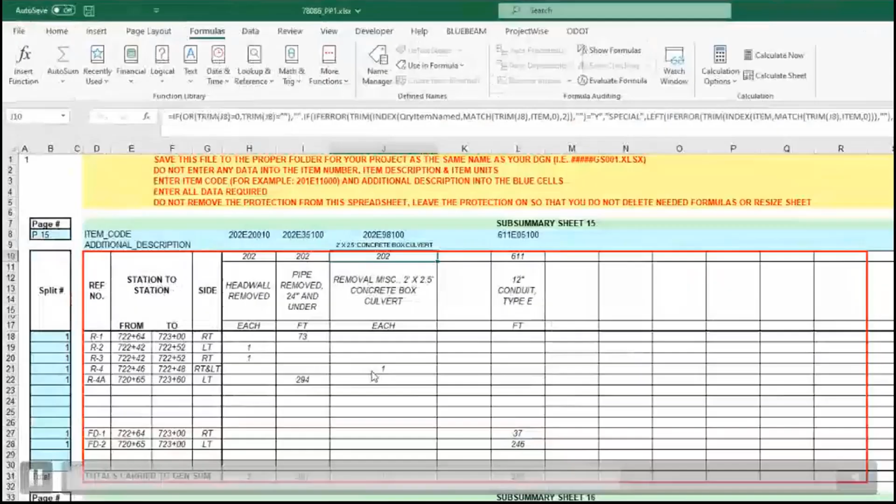So if I open up that sub-summary sheet, look at the formulas and the name manager, here's how you can tell what you're linked to. There are two named ranges in there, and if you look, it'll list the path to that GenSum file. That's how easy it is to tell what your sub-summary sheets are linked to. I know it's probably hard to see, but you just go to the name manager and take a look at the path that's listed, and that'll tell you what that specific sub-summary sheet is actually linked to. So hopefully that's pretty clear.

Just to be clear, we're changing what we recommend from linking to the add-in to linking to the GenSum. I don't know how many more ways I can say that, but that's what I recommend you guys do. That way your GenSum, you refresh it for that project when you want to, and everything for that project, the sub-summary sheets are all referencing the same copy of the item master, and it can stay there. When you file it, you don't have to refresh it - you've got that saved copy of your item master with that project at the time you filed it. So that's why we're recommending that; I think it's a better approach. The add-in was just an easier approach - you don't have to go and select a file, you could just hit Fix Links, and it can just know because the add-in's loaded.

So if you guys have more questions on that, feel free to email me or rather submit a support request.

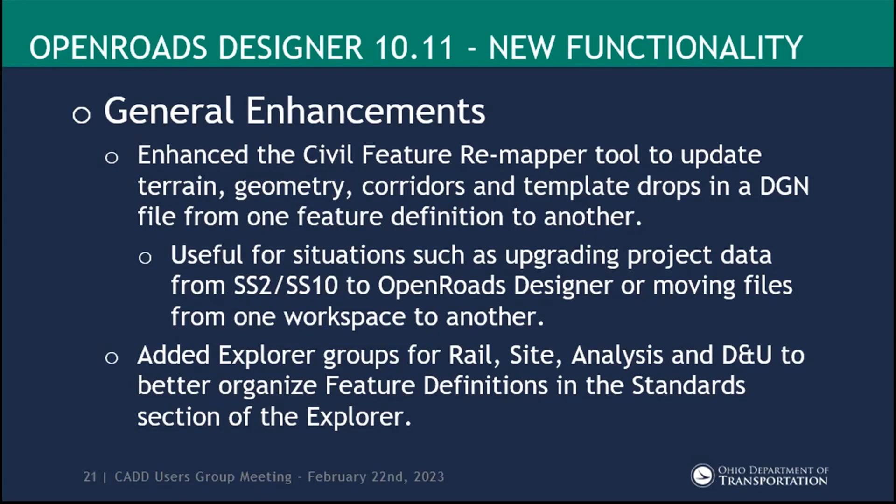Civil Labeler—we kind of scratched our heads when they first introduced Civil Labeler as a tech preview, and you had to manage it with an XML file, because we've always known they've been trying to get everything into DGN libraries. So with 10.11, they moved that XML file to a DGN library. Not really a big deal, but I'll talk more about what that impacts later, at least for the current situation.

Civil Labeler itself added some new functionality and usability, like lock perpendicular. So if you're adding in a bunch of labels, you can lock those perpendicular, your little station ticks, at the end of your guardrail or whatever. And some new border frames. We don't use a whole bunch of those, but if you like that stuff, you can go in and play with them.

You can now also override text and dimension styles. Previously or currently, you really get what's set up in the label definition. It doesn't allow the user a lot of flexibility if they need to modify it.

So kind of nice to have that too. The last bullet point here is they added a cross-section two-point method for the slope or distance between two points. We found a VBA that was posted on the Bentley communities and added that to our workspace with a couple modifications in one of our last big updates. That does what we already sort of implemented, but there were also some other enhancements included, and a lot of those were things that we had submitted to Bentley as well.

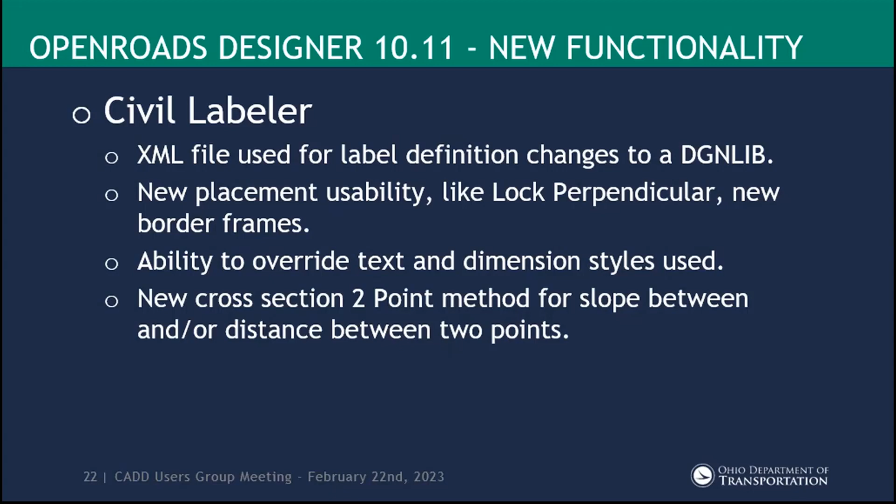You can now add your station ranges on your sheets with a new text favorite. So for plan, profile, and cross section, there are text favorites for minimum and maximum stations. Hopefully we don't have to go in and label those on our plan and profile or cross section sheets now — it'll just read the stations that are in the sheet file.

We will need to figure out how to integrate those text favorites into the item types we're currently using so that they're populated in the sheet manager. And that brings up a whole other thing: what happens if somebody modifies the sheet stations within sheet manager? That'll be a programming challenge for JD.

There's a new expression builder. This probably doesn't apply for most folks sitting out there unless you're really dealing with workspaces or modifying things. Maybe you need to add some new item types for something we don't have, or something special to your project. What it does is allow you to go in and build an expression based on an element's properties — you select the element and it'll show you the properties, and you can build your expression that way.

I wasn't sure how to word this one, the Create Templates classifications integration. In the Create Templates dialog, they've added a new classification option or setting that you can add to any component. So I can tell my pavement that it's roadway, or my sidewalk that it's sidewalk, median, shoulder, roadside grading, whatever the case is. This used to be called semantics by Bentley, and it's now been renamed to classifications.

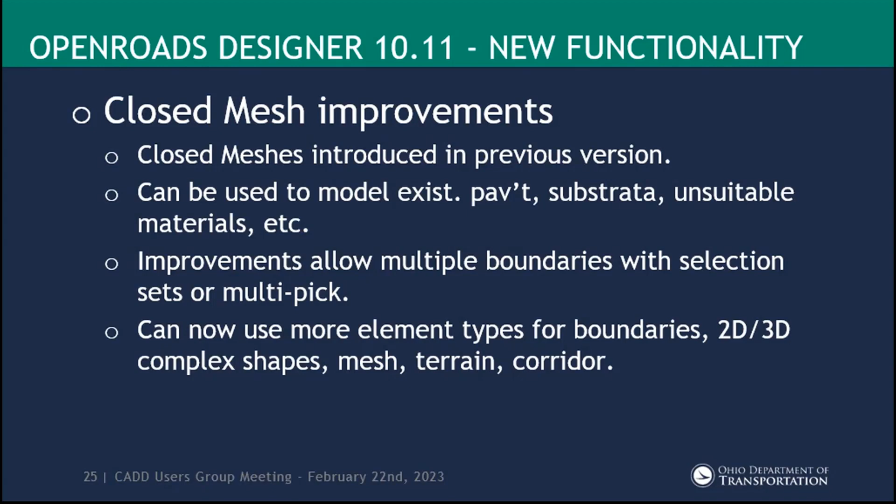The last bullet point here is you can also use different element types as boundaries — different 2D or 3D complex shapes, meshes, terrains, or corridors. In one of the examples in the Bentley playlist, they actually used a selection from the corridor model's cross-section view, using the bottom of their pavement to create a mesh that went down to their existing ground in a fill type situation.

The next thing they added was computing station offset with expression, so you can add a reference element or alignment to a component. If we select sidewalk, for example, I can go into the properties dialog and tell it I want to add a reference alignment to that. In the properties, it'll list the station and offset of that element, where it begins and ends. So from a quantities perspective, all you really have to do is select that element and you have all that information there.

You can also add multiple reference alignments to a component. Say at an intersection, for example, you've got your curb or sidewalk going around the radius of the return. You can add in the reference alignment for each roadway.

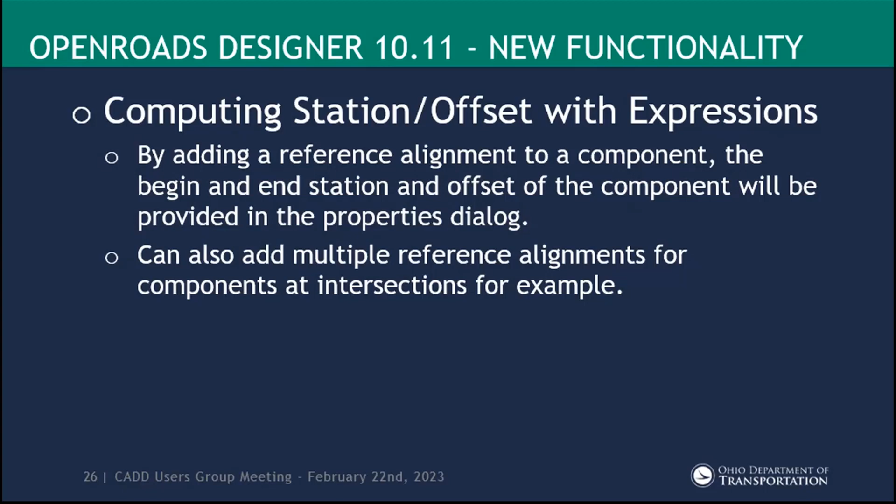The create cut and fill volumes tool now will search for previously created meshes. So if you've gone in and created your CADD file and created those prismoidal meshes to get your earthwork volumes - I know I've done this on numerous occasions - I just rerun the command, and next thing I know my quantities are double or triple because I have 2 or 3 sets of those meshes in there that I forgot to delete, or maybe the level was turned off or something like that. So it'll search for that when you run the command.

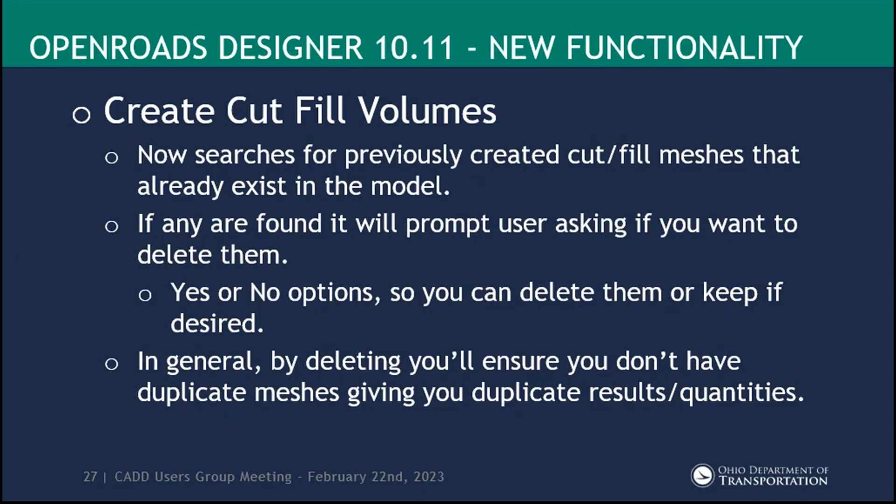It'll prompt you asking if you want to delete them. You do have the option to say yes or no, so you can delete them or keep them. In general, I'm going to recommend you delete them and just start over so you don't add in or have duplicate results or quantities there.

The feature definition wizard, this is another one. If you're not really working with a whole lot of workspace management type stuff, this may not apply to you all the time. Again, it might, or maybe you have something special to your project you're trying to create a new feature for. But if you've ever needed to create a new feature definition, you realize there's a lot of parts that go into it. So this is kind of like I would compare it to the corridor objects dialog, where that bucket list icon shows you everything about your corridor.

This kind of does the same thing with the feature definition. It'll let you create your feature definition, your feature symbologies, your element templates, set your levels, weights, colors, add your annotation groups, item types - rather than bouncing around going 'oh I got to create the feature, now I got to go create the feature symbology, which means I got to go create an element template, and then I got to come back and do the annotation.' So it's kind of neat. I haven't really played around with it much more than looking at the video, but I imagine that'll help at least us, and I'm sure in some cases it'll help some of you.

There is a new super elevation cross slope text favorite. What that means is we can add that into our curve data or curve set that gets plotted under our drawings, and we can populate the Emax now. Currently we just have 'Emax equals' and a blank field for you to go edit. Now it'll read the super elevation from the curve we've assigned to it and apply that to our curve data. It's also dynamic, so if that super elevation rate changes, the curve data will also be updated, just like any of the other curve data would be.

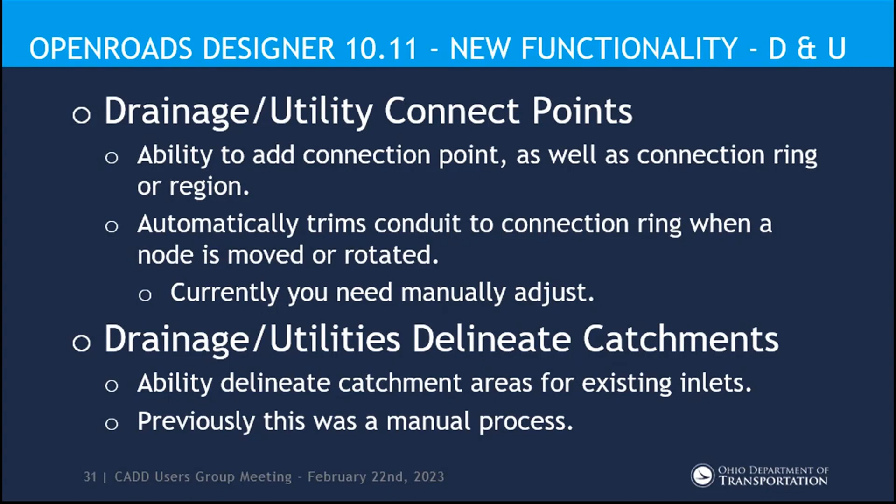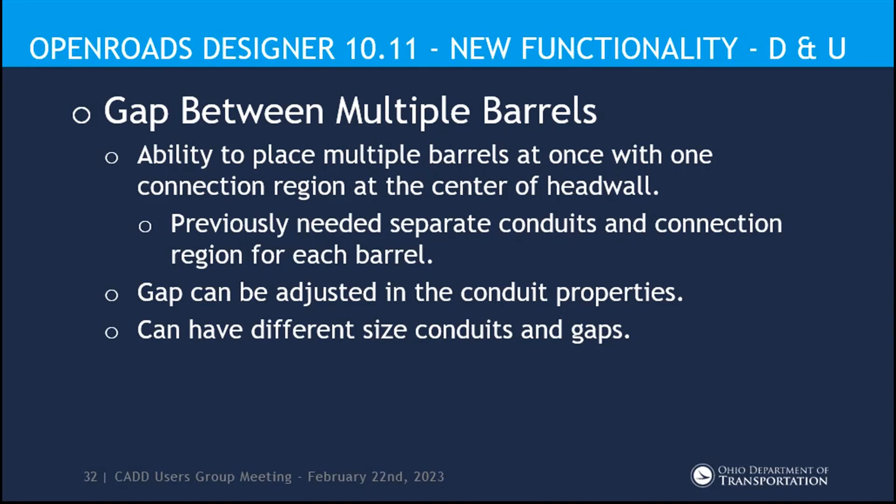I know we have culverts out there that are made up of multiple pipes and barrels, and in my experience I don't know if I've ever worked on a project with one, but they heard folks asking for this and added the ability to add multiple barrels at once with a single connection region. Meaning you can select the center of your head wall and that'll be your connection point, whereas before you had to create separate connection points for each pipe. You can also adjust the gap between those pipes - I don't know how that actually works right now - and then you can have different sizes of conduits and pipes within those. So maybe your outside conduits are smaller than your two inside conduits, maybe on a 4-barrel type situation.

So there are new item types that are added here, support for the new drainage and utility feature definitions and the single source of truth. We've heard this many times from Bentley, so hopefully this really gets us there where we can see the item type properties that were added in plan view, profile, cross-section, 3D, without having to go back and forth or even run an extra utility to sync up all those properties.

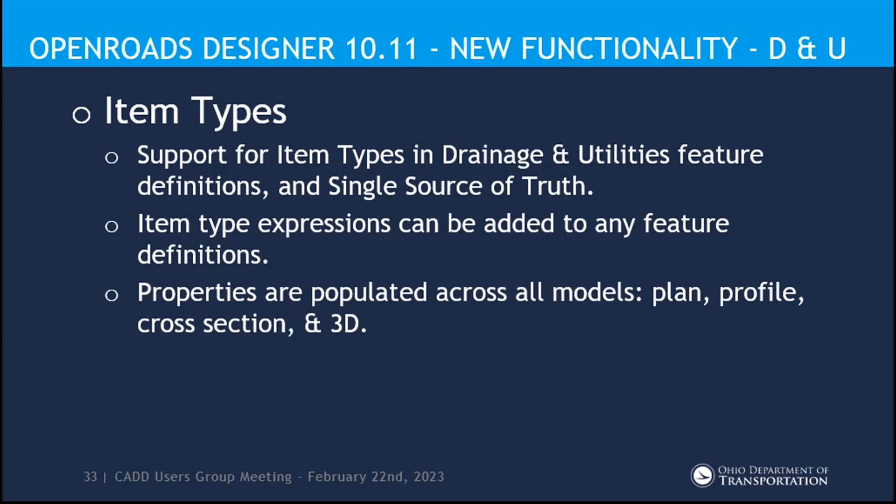So pretty much everything I just mentioned as far as MicroStation and ORD is in all these links. If you want to review this PowerPoint later, one of the guys can post all these in the chat and you can come back and look at those. The YouTube playlist really shows all the examples, a lot of things I pointed out. There are a lot of other enhancements and updates - those are just kind of the big ticket items there.

All right, so what are ODOT's issues or concerns about maybe going ahead? Again, there's a schema change here, so we need to be cautious of that so that everyone's using the same schema. But what else have we kind of run into?

One of the things right away is Civil Labeler. I mentioned earlier the XML file conversion to DGNlib. They do provide an import tool which works really well, brings everything in. What I did notice right away is it leaves off any of the leaders that are attached to my labels, so we're going to have to go in and clean up every single one, check every single one, make sure they all still work the way we intended. Not really any showstopper by any means, but it's just going to be an effort on our part before we get that out.

And if you were to go ahead - I know some folks already have moved to 10.11 - when you go in to load Civil Labeler, you're just getting a blank dialog because it's looking for a DGN library that we haven't defined yet for 10.11. So essentially it's not going to work if you migrate that way. You can import that XML file on your own if you're comfortable doing that and modify it, or create your own DGN library and add it. That's one of the advantages of going to the DGN library versus the XML file - we can have our predefined labels, and then you could set up your own company or project ones, add to a DGN library, and have them all populated in a list.

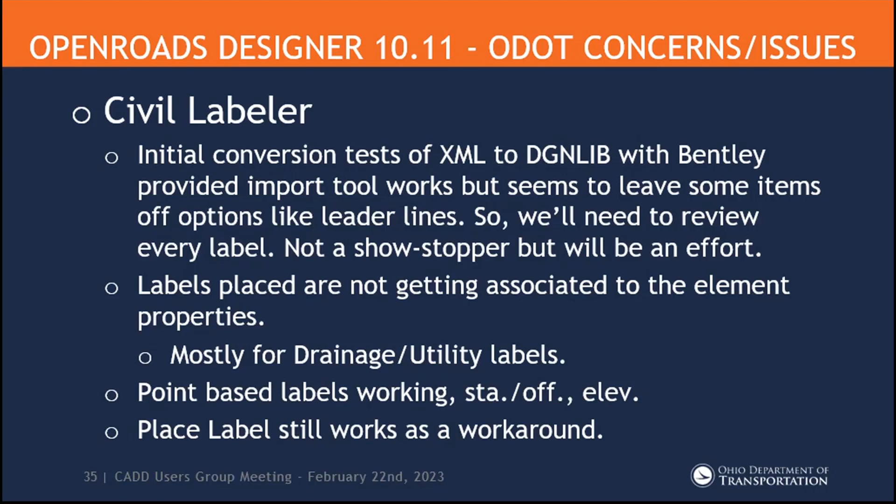JD just said that Bentley support has told us that the item type issues with civil labeler are fixed in the next release. So, probably should have been - well, we don't know what the next release is yet, but...

The drainage and utility item type sync app that we have stopped working with 10.11, but we've already released an update to that. So as long as you're using the current version of the Workspace that has version 1.006 of that, you should be good to go if you're using 10.11.

If you're using ProjectWise managed workspaces and the new manage configurations part, as you can see on that screenshot, when you launch ORD or MicroStation on the left-hand side, you'll get this manage configuration dialog. You can define multiple locations if you have different clients or different workspaces you're pointing to. You can do that in your managed configuration, but what we found is that is breaking our ProjectWise managed workspace.

Bentley says that that'll be fixed in ProjectWise 4.0, as well as a whole bunch of other updates that they keep saying are coming there. So we're waiting on that. The quick fix or workaround would be just to reset your user preferences, and that cleans up any issues that you might have had.

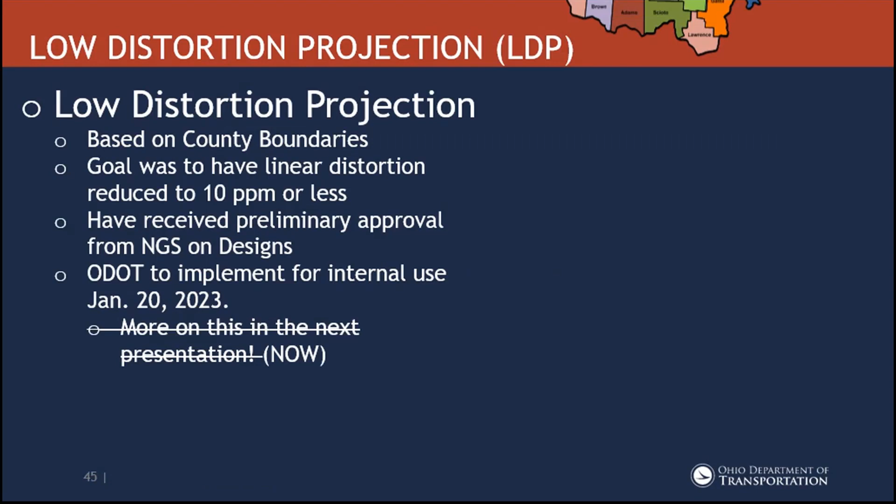All right, we're going to switch gears a little bit and talk about some coordinate system updates that we have. Last time we had a user group meeting, I talked about the low distortion projection systems that ODOT was coming out with. We've named those the Ohio County Coordinate System, or OCCS. I still call them LDPs, so it's tough for me to make the switch to the new name. But I wanted to talk about the background, so we understand the direction we're going, and then get into how we can actually use it and where we can find that information.

They're going to be based off of county boundaries. We did that to try to make it more user-friendly, instead of combining it based off of some landmass or something like several other states do. Our goal was to try to reduce our linear distortion to 10 parts per million.

So a really tight coordinate system that basically allows our grid distances and ground distances to be the same. That's kind of the main goal behind it.

So we did implement these for ODOT use, and then anybody else can also use them as well, on January 20th with the DRRC update, and spelled it out in the L&D and the surveying mapping specifications.

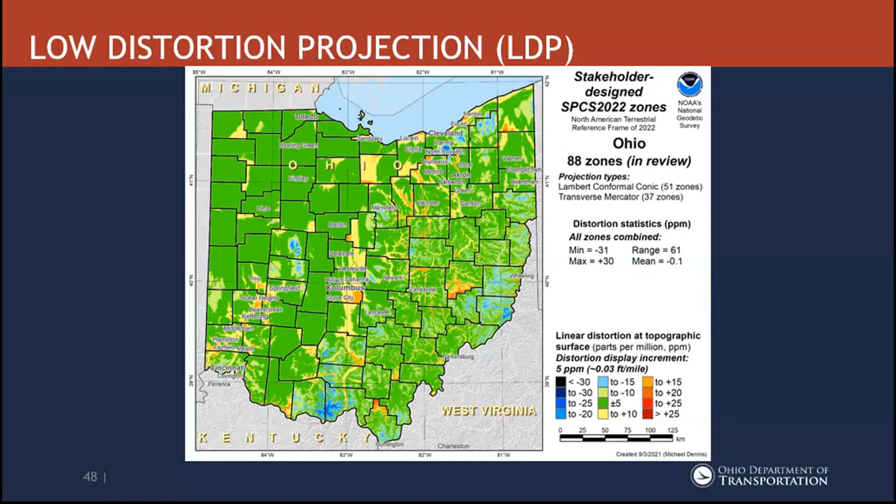So that's what we've went out and did, and we released those. We have 88 new zones, and they were approved by NGS for approval in the next release anyway. So we just kind of moved on with it.

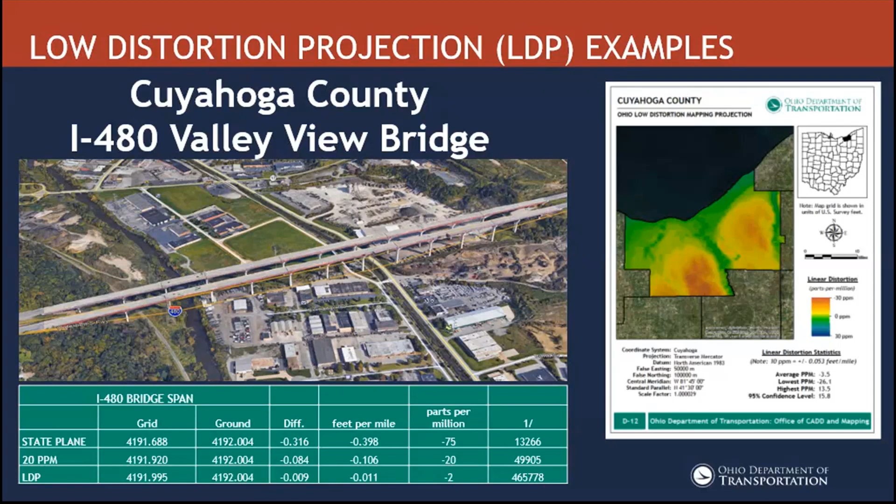Now, if we use a low distortion projection when we were collecting that information, like say we're using a GNSS receiver and we use the LDP, we would see 9/1000ths of a foot of difference between the grid and ground distance. So essentially, by using low distortion projections, we're making the grid match ground. It's going to save a lot of time and effort when scaling projects. Everything's going to fit together a lot easier between these different coordinate systems, and it's going to allow everything to reproject a lot more smoothly.

So we released these on January 20th. The Ohio County Coordinate Systems are posted on our website. I didn't do as good a job with the links as you guys did, but you can find them on our website. There's a page for it, and I do have it embedded in the PowerPoint as well.

But moving forward, ODOT projects are going to be scoped with the OCCS county mapping projections, unless that project doesn't fit that type of environment. So we do still have the state plane north and south inside the standards, and we'll get to that in a little bit. But we can still scale a project if that fits the project you're working with.

If the distortions are too big, maybe you go into two different counties or something like that, it may not work by just selecting one of them. So we still do have that option.

So what's on our webpage? We have a manual that we've developed, so we'll get into a little bit of that. We also have the zone parameters and some test points as well, so if you want to test your software, we have some points as well as the LDP coordinates of those. We generated Esri projection files, so PRJ files for all 88 counties, and we have those zipped up on our website. We have Trimble and Leica file formats, and we'll talk about some of the other manufacturers as well on the website. So there is a link there and a bunch of downloads that we have available.

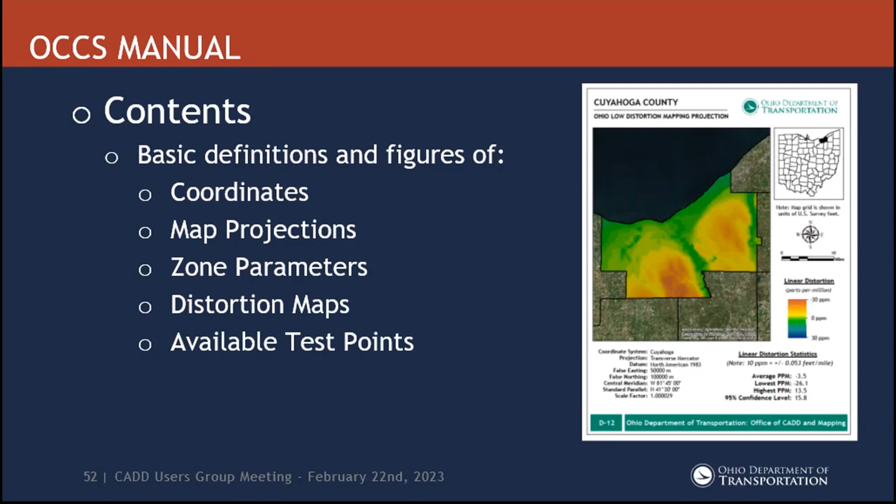So I wanted to talk a little bit about some of the different manufacturers. For Trimble equipment, internally we mainly use Trimble and Leica equipment, so that's why I'm going to go through a couple of those examples.

For TBC, you can go into the Coordinate Systems Manager and then import the .csd file that we have available on the website, and that will show all 88 of the counties. If you're looking for other state plane zones and things like that, they're just hidden in there. So if you do work for other states and all of a sudden you're like, oh, where's Indiana? You just unhide it in there, and then it'll end up populating in your list. So we didn't delete them, they're all still in there. We just hid them to make it a little easier to find.

In the data collectors, very similar process. You just have to browse and copy that custom CSD to the Trimble Data System Files folder on your data collector, and then that'll show up inside of there as well. Very similar process for Leica Infinity and Leica collectors. Basically, you just go into the coordinate system tool and then import in a TRF set file. You basically just bring that into your DBX folder on your SD card or your collector, and then you'll have those coordinate systems inside your software, both in the office and out in the field.

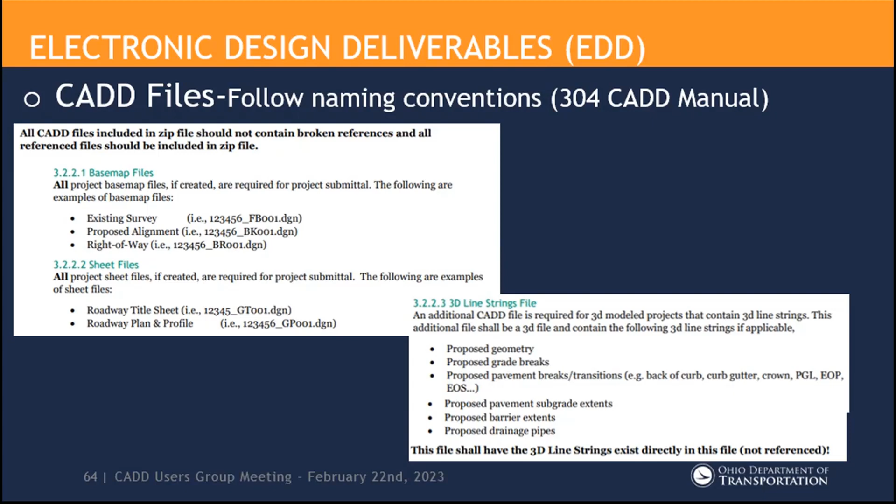So base maps and sheets, I think we all know what those are. Those are hopefully pretty easy. You just select the ones that you want to include in the zip file and you include them. Now, 3D line string files, we don't really have a file set up for that just yet.

I added a video here to go over a process that you could use to create a 3D line string file. So some things to know: when the contractor's trying to pull in DGN files, they're kind of limited on what they can read. They can't really read sheet models at all, mainly just the base maps, and they can't read references either. They can't go and read across references.

So this new requirement to include these 3D line string files is really going to be making a static line string file for them. It's going to involve referencing in your line strings, basically merging all those references into the file and calling that your 3D line string file.

I get that that's a little bit of additional work, but it's something that I think is needed moving forward as we are trying to pass this data along. Let me play this video and go over a little bit more detail.

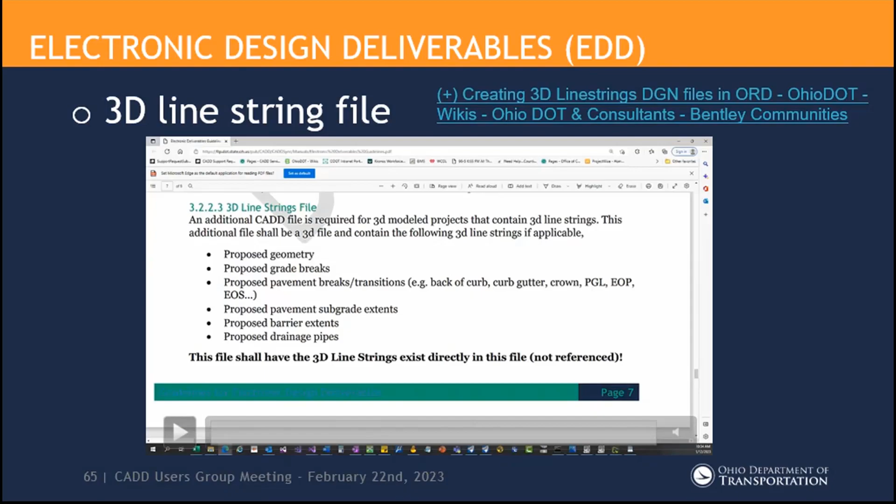So here's a section in the document, and I list some of the things that should be included, like proposed geometry, your grade breaks, pavement transitions, barrier extents, things like that. This section will most likely be updated as we fine tune what should be in this line string file. But really your edge of pavement, things like that—those 3D line strings that you're generating automatically anyway when you're creating it—are what we're really looking for here.

And it can't be referenced because the contractor cannot see that data, so I bolded that here. We're going to create this file, but can't leave those references in there.

So I should be moving on to give a quick demo. Hopefully—I guess I had a lot to say in this video.

I guess I want to reiterate that it will be static, right? You're merging these graphics from the reference into this DGN file. So it's something you would do at the end real quick. Maybe you set up the file with the references and then make a copy of that file when you're ready to merge it. So if you ever do change something in the future, you can go back to that original one with the references and redo the process.

I did create a new file type for this. So if you use the Create Design Files app, it should be the KL, I think, if I remember right. Yeah, it says 3D line strings as the description.

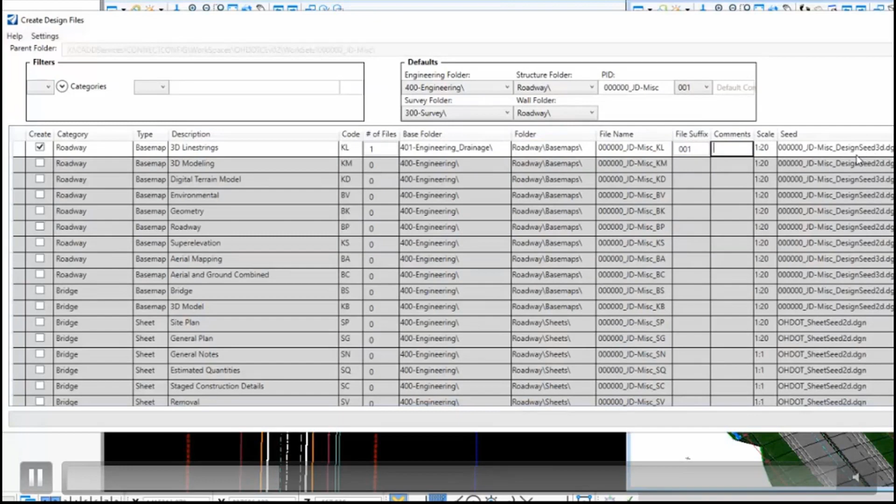So you can go create this file. You want to use the 3D seed file since these are going to be 3D line strings, right? So you might as well—it should be defaulted to the 3D seed. So after we create that file, go ahead and open it.

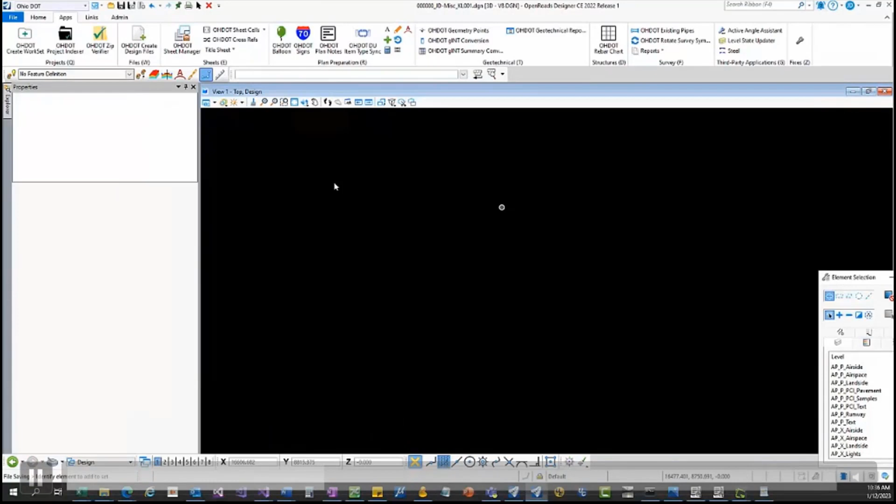And all I'm going to do is add the references to, say, my geometry—my BK, my corridor files, things that contain those proposed line strings. So most of the time it's your corridor file. So I'll go and add these in.

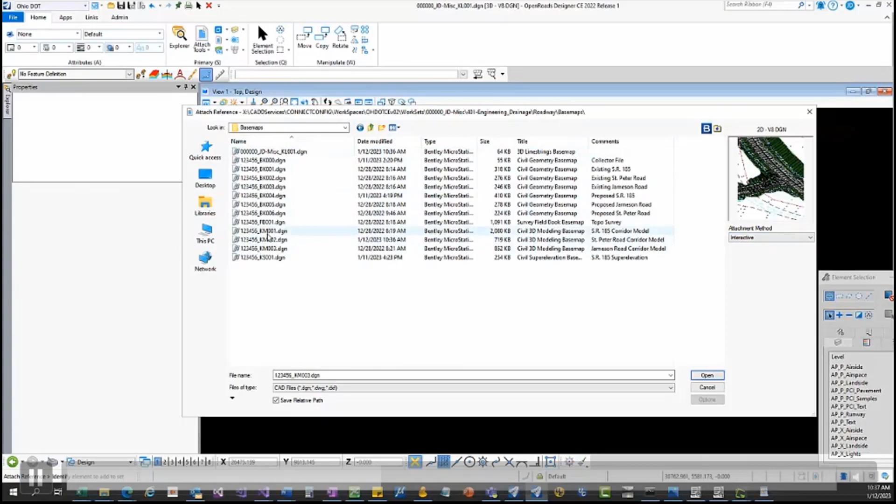And this video has also already been posted on the wiki page with audio. If you guys have been searching around, you might have already watched it. So here I'm just going to add in those corridor files.

And when I add them, I'm going to switch the model that I want to include to the 3D model and not leave it on the design one, right? I want to make sure I grab the 3D reference because that's what contains my 3D line strings.

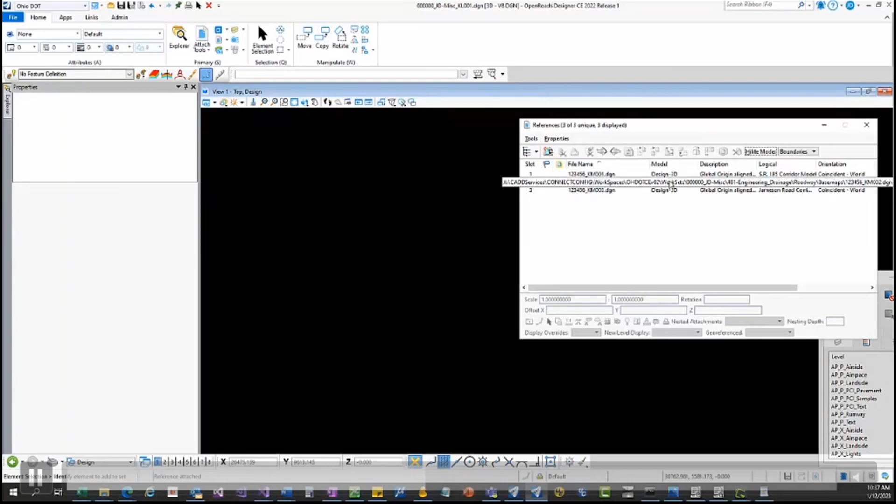So after I add them, I'm going to go through and just turn off levels—all the surface levels, the things that really aren't 3D line strings that we don't want to include in this file. So you just take a look at it and see what's still on, and go through and turn on or turn off what you shouldn't need to see. So mainly it's the surfaces, and then you'll end up seeing edge of pavement, all those grade break lines—that's really what we're after here.

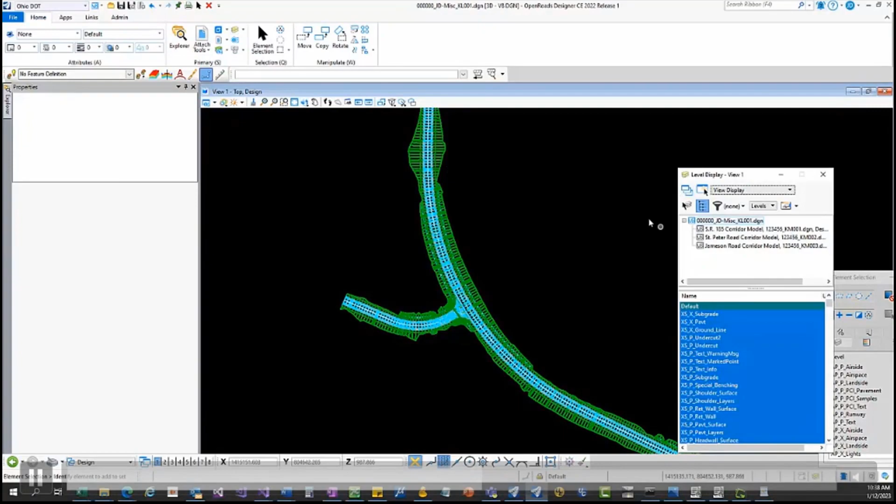And again, we'll fine tune the requirements as we get this more in use and get more feedback from the contractors of what they would really like to see. But this is going to make it a lot more feasible for them to actually pull in the data.

So after I get all those levels turned off, you can rotate around and see if you're missing anything, or if you still have anything on.

So then after you do that, I'd recommend the workflow would be to save this as a copy so you can come back to it if you make changes. Maybe you keep this as the reference copy, and then make another copy for doing your merging in. That way you don't have to keep re-adding the references every time you make a change. Hopefully that makes sense.

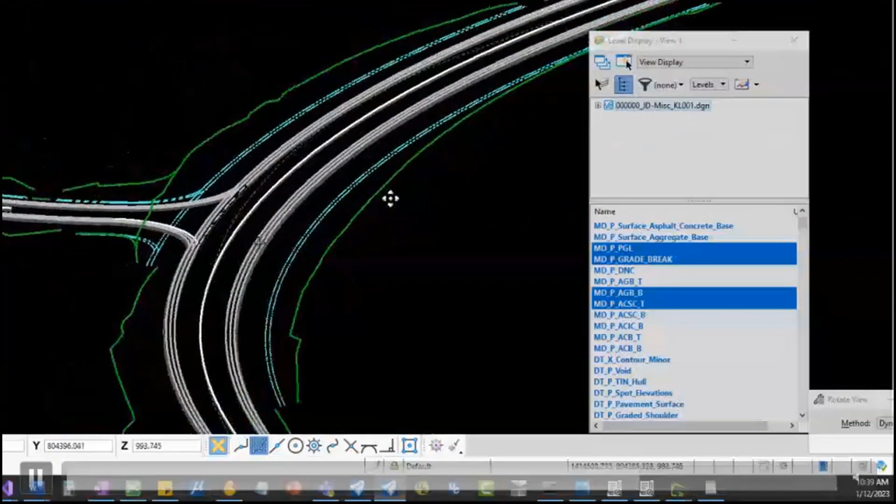So I'm just kind of looking around, seeing if the line strings that I expected to see are there. I do. So I think, if I remember right, I come up here and save a copy of it, so I'll do a save as, just to save myself. But again, you're going to do this at the end of your project, when you're close to the end, where there probably won't be more changes.

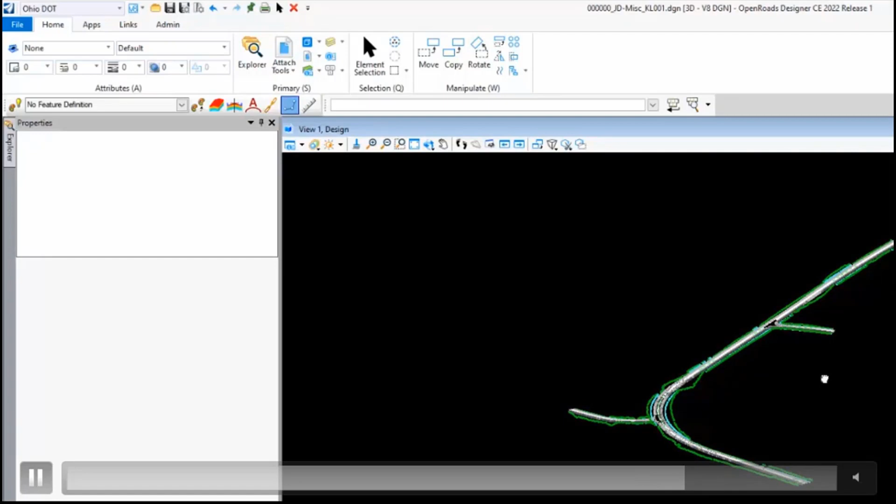But let me jump forward a little bit here. Oh, and I shouldn't have done that. Oh, man. That's why I don't like presenter mode. All right.

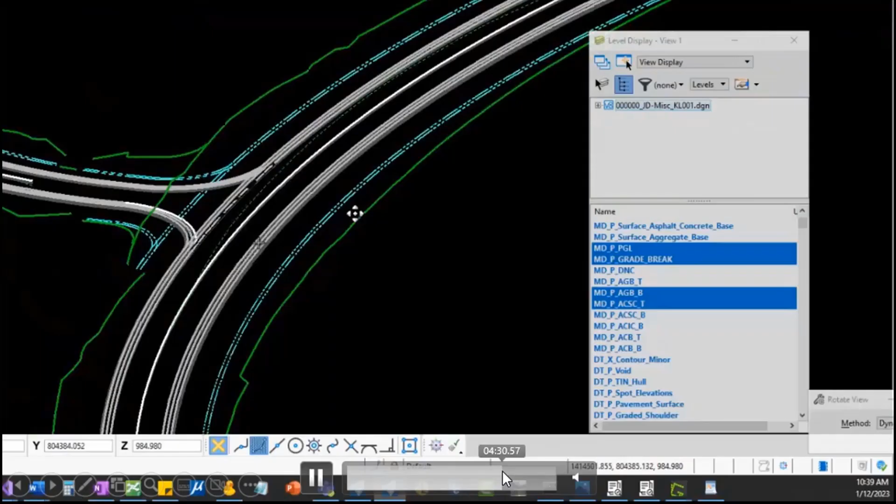So I'm doing the save as.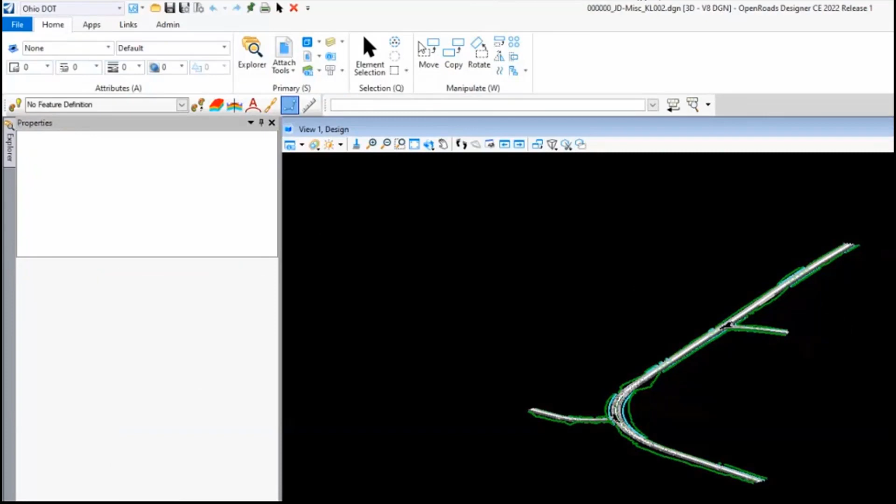So in my copy now, here's where I'll just do my merge, since the contractor can't read across those references that I added. So I'll go to my reference dialog, right click on it, and hit merge into master, then click in my view, and that will merge the references into this file, only the levels that I have displayed. And there is your 3D line string file.

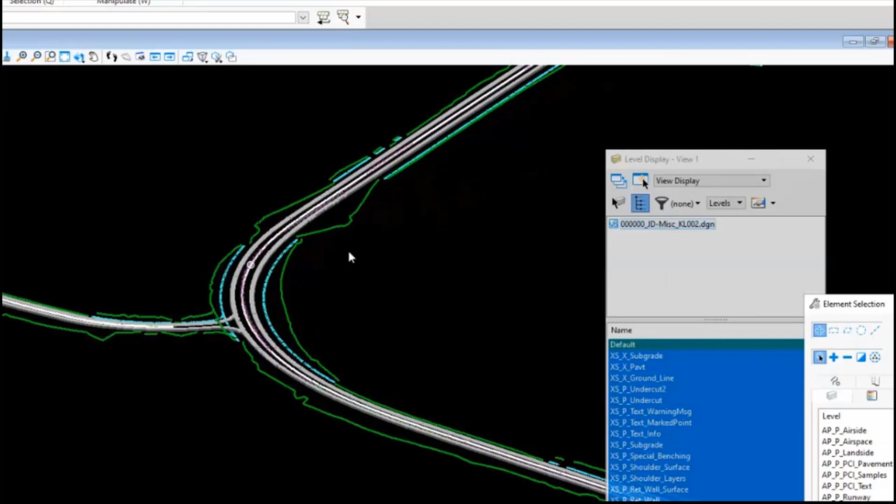So it might have been a little longer video going over a lot of stuff, but really: add a couple references, merge it, there's your 3D line string file, include it in the zip file, and that'll help the contractors out. That's a newer requirement in the electronic design deliverables guideline that wasn't there before. Back in the Geopak days, we really didn't have 3D line strings to do something like this, unless you were doing like the OpenRoads tech. So hopefully that's not too much heartburn for you guys. I do realize it's a slightly additional effort there.

So moving on, some other things: the alignment files. While the contractors can read in your DGN data and get those line strings, when it comes to alignments, it's not going to read in the stationing data. So while DGN graphics are good for bringing in those 3D line strings, when it comes to the alignment data and stationing, it doesn't work so great right now. That is why there still is a requirement to take your alignments and put them into LandXML format, and the contractor can bring those in and get that stationing data with it.

So some recommendations, or requirements: each LandXML file should only contain one horizontal alignment. Don't put all of them in one, but you will also include your proposed profiles if there are any proposed profiles - you can include that with that alignment in the same LandXML file. And then when it gets time to running this app that'll help you, it'll actually extract those contents from the XML and list it, so people can just look and see the names and profiles that are in those files without having to dig through the files.

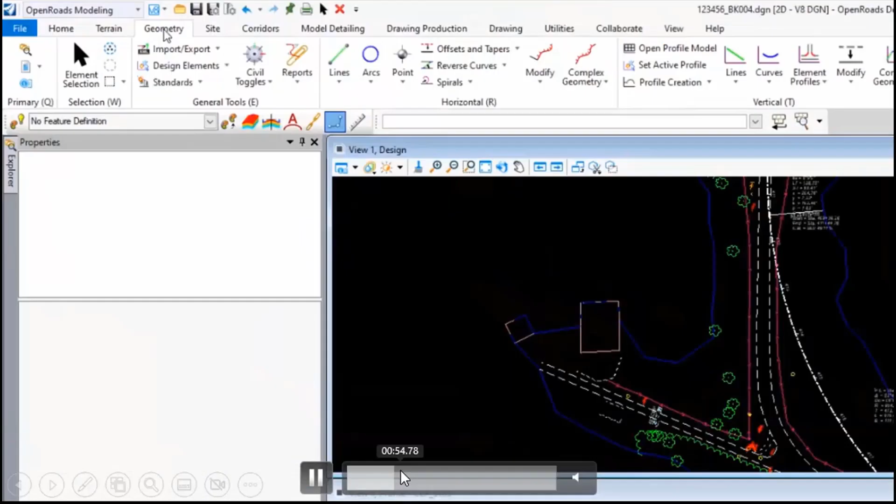Jumping forward here - I'm over in my geometry, and you see that import export option. You go down to export geometry, and you'll get a heads up display telling you what you want to export. Come in here and choose LandXML.

You can leave it on that 2.0 version. You can check on 'only active profiles' - so if your alignment has a bunch of other scratch profiles, maybe you did some ditch profile work or something, checking that on means you'll only get the active profile, which should be the proposed profile you want to include.

So you'll just click through the prompts. You're exporting it out as a LandXML type, then select your alignment - go over and select it, then reset, because you can select multiple, but we don't want to select multiple, we just want one per file. Click on that, reset to complete your selection, and then you should get prompted with the Save As dialog.

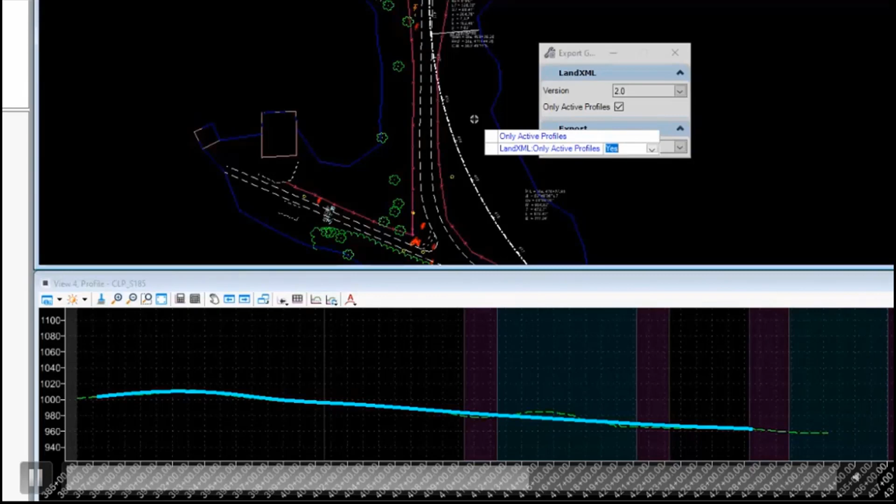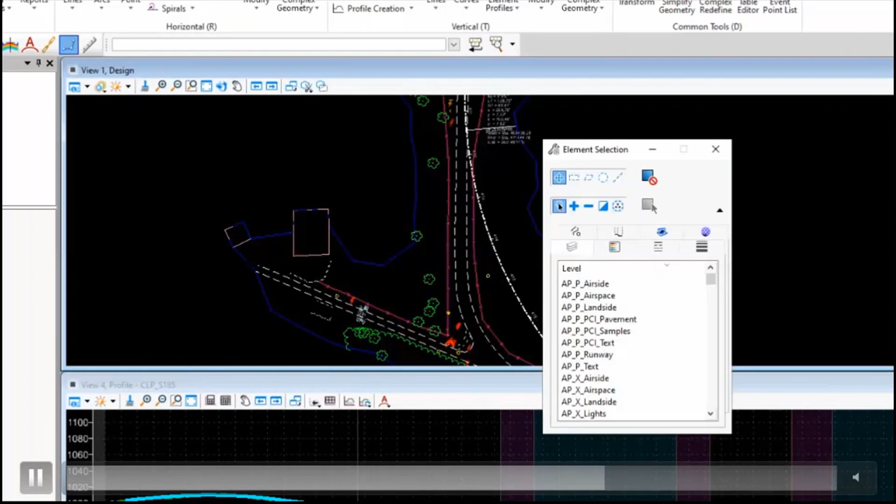We're just clicking through all the prompts here, all the different options. So here's the Save As dialog - you can choose where you want to save it. I launched this outside of ProjectWise, but I believe a few versions ago they fixed it so it would open the ProjectWise dialog instead, but since I didn't launch from ProjectWise, it didn't happen here.

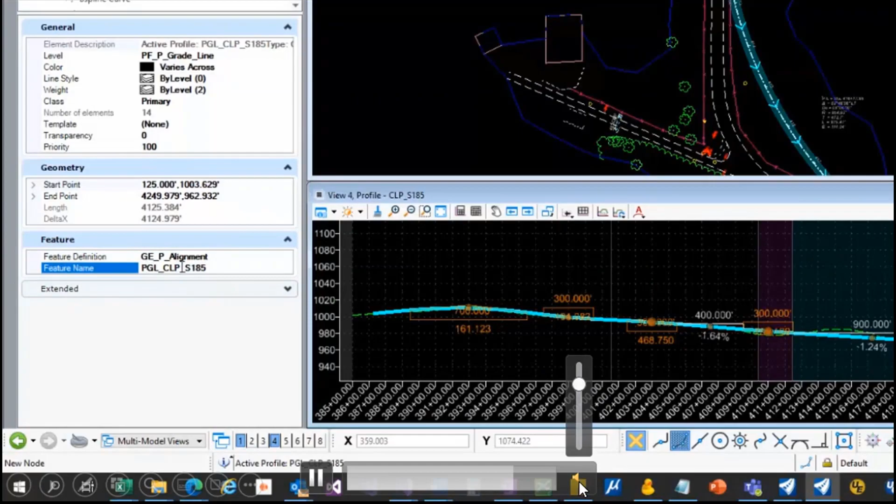But that's how easy it is to create a LandXML file - you just click on your alignment and it generates that LandXML file. So I'm showing the profiles, feature name - I think I'm just showing this because it will show up. So I opened up the file, though you don't have to open it up.

But if you take a look, you can see the name is in there, and that's what I'm going to pull when I read it. Same thing with the profile - the profile name is in there. So you do want to make sure you're naming your profiles and alignments according to our CADD manual.

Typically the CLP and then the route name for Centerline proposed. So that last thing was just noting to follow the naming conventions so that people know what they're looking at when they pull in these LandXML files.

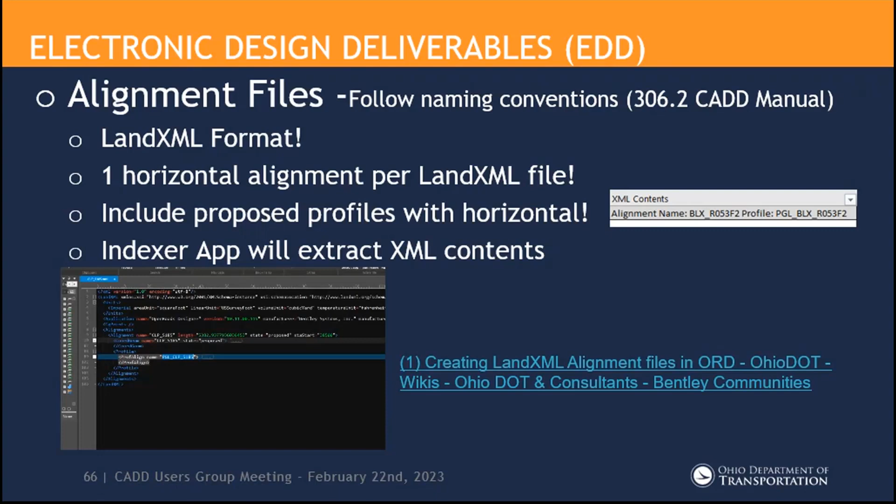So that covers LandXMLs for surface files too - same thing, LandXML format. Mainly your existing surface, your existing survey data, export that out to LandXML as well. If you have any proposed surfaces, like an overall proposed surface or other surfaces you created through the process, you can also put those to LandXML. I have another video with a very similar process for exporting a surface to a LandXML file type.

I'll skip forward here so I don't put you guys to sleep. So I'm over there - I don't know if you saw, let me back it up just a little bit. I'm here in the Terrain tab now, and I'm going to zoom in on the Export to File button right in the ribbon.

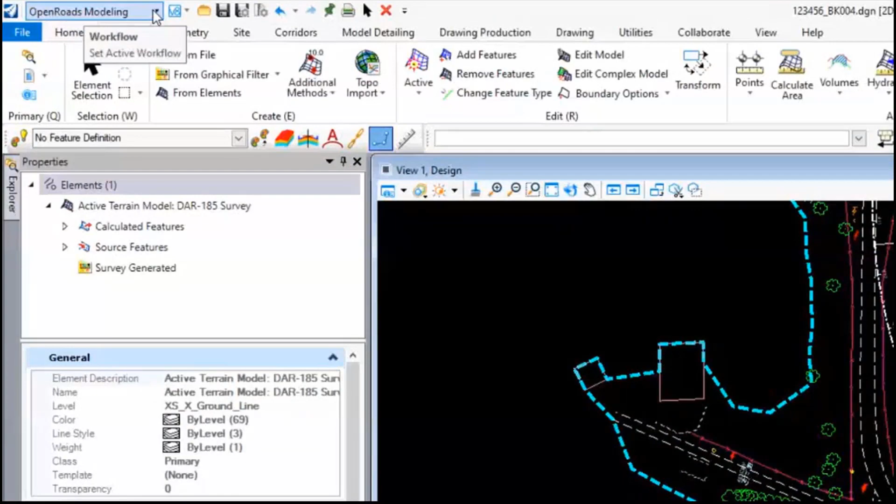So under the OpenRoads Modeling Workflow, the Terrain tab, then Export to File. I'm going to click that, and I can select a terrain from the drop-down or graphically select it, then choose your format - it's going to be LandXML format.

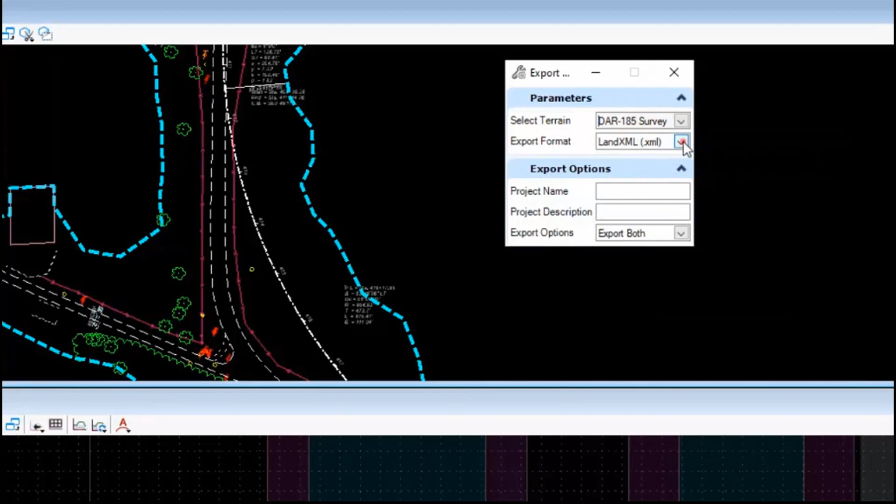There are some options to put in, like the project name and project description, which I don't think you have to put anything in there. I don't think I'm reading it. Let's see what I do - I guess I'm putting in the project name maybe. It's been a while since I made this video.

Yeah, I think I was leaving it. I clicked on the wrong thing again. Let me go back.

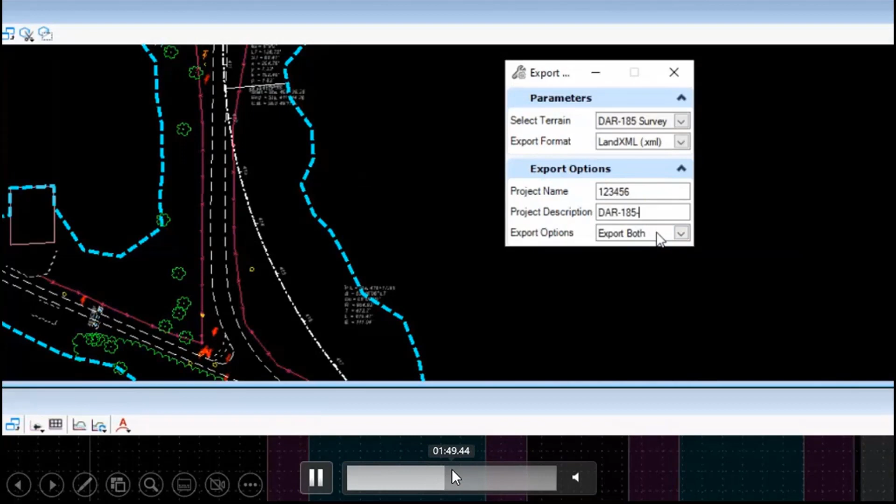Okay, so you can put in a project name, description of like the PID, maybe the county route section. I think that's more optional - if you wanted to fill that out, you could. And then you're just going to click through the prompts.

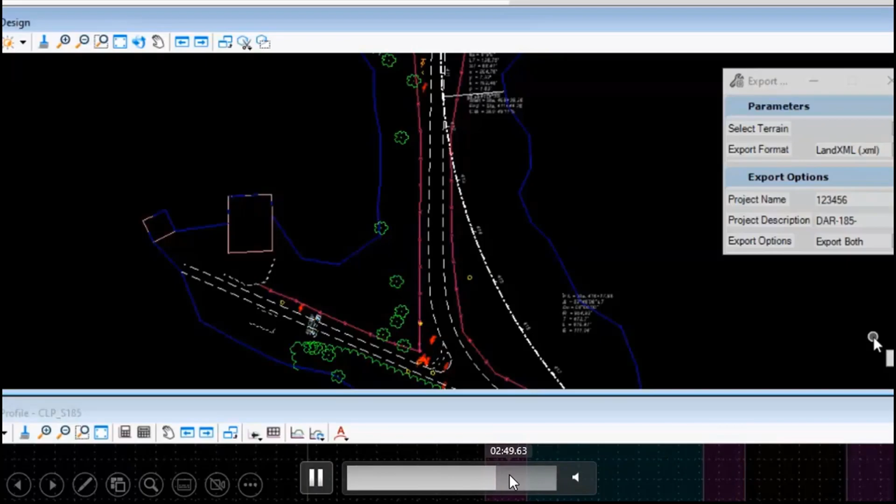And it'll again open up a Save As dialog. Save it. And then there is a name there. The feature name is what will come through. So if I go and open that file, again I don't expect you guys to open it, just kind of showing you the data's there and the name does get put in there. So there's that project name and description that you can put in there, and then there's the surface name. All right, so that's really how simple it is to create these file types.

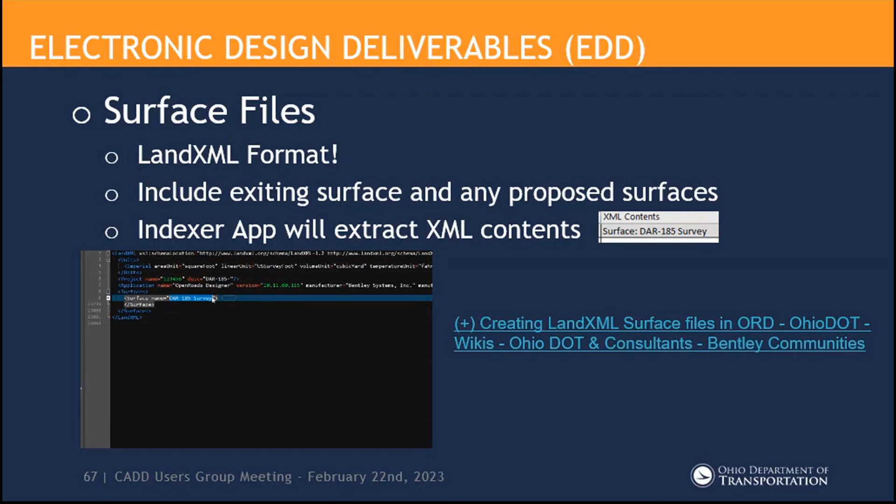We've always kind of had this requirement, even back with the old document, for creating electronic deliverables. So just really all your alignments, your existing surface, if you have any proposed, go ahead and put those to LandXMLs. So moving on, the other thing we want is your engineering data.

So these are things like your Excel files, if you have any calculations, kind of all that source data that goes along with that project, we want you to include it. So your tables, if you have a table that's inside MicroStation, like a sub-summary or something, we're also expecting to get the Excel file if you used Excel to create that.

And that's useful on several fronts. People are trying to create estimates from the contracting side, we'll go in and look for those files to pull that data a little bit easier. I've heard internally our construction project managers are going in there and trying to pull that data as well if they can find it, to help them go through their process. So we want to make sure we're getting that, along with any kind of other supplemental engineering files. If you're doing any kind of design work like HEC-RAS or something, include that stuff too.

So moving on to the survey data, there is a surveyor report. It's an Excel file, and admittedly we are going to be doing a complete revamp on that. I think Kyle started gathering the new requirements from the last SOM meeting. So I know if you guys are on the survey side, a couple of you have been submitting lots of tickets on this front, improvements to the Excel files or problems. And so it's not going unheard. I will say we're probably a little bit behind on that. We should have already made some of those changes.

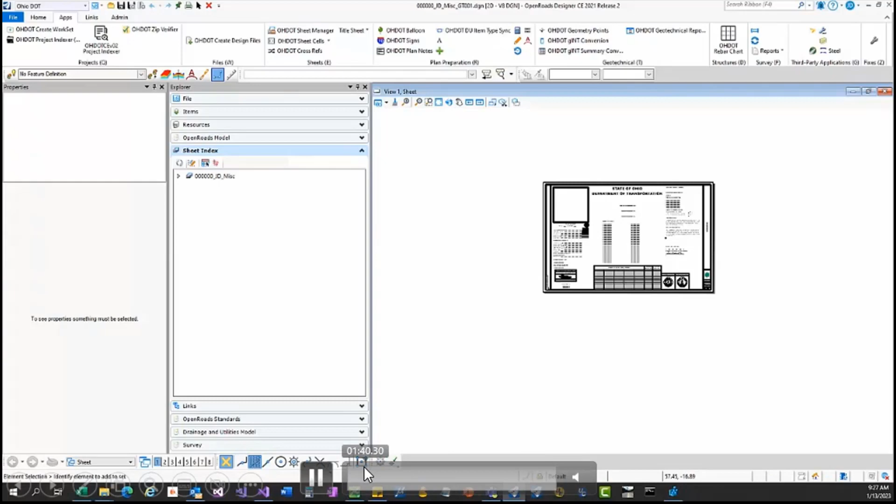All right, so I'm going to select this folder location, and it's going to read that folder location and verify that it actually has all the folders that it's expecting to find. It'll tell you in the bottom of the results if it found something, and if it wasn't in the right format, it'll tell you what it's missing. But if you are inside the data source, it will list the data source you're in, and it'll also give you a log out option if you need to switch.

And if it can find the PID number from the folder name, it will go out and read TIMS and try to pull in the county information. If not, you'll notice the PID and county box will just be default values - you'll just have to fill those in. Depending on how you name them, I might not be able to pull out that PID number, and it might not be in TIMS to pull from.

Okay, so the first tab you're in is the root folder selection. Basically you're going to select the folders you want the application to search through - that's where that processing time is coming in. If you know you're not going to include anything in the admin folder, don't check it on. You're only going to check the folders that you're going to include files from in the zip file. By default, all the 300 and 400 folders should be checked automatically, along with the 990 workset standards folder.

That will be checked off automatically. The 990 folder you cannot check off—I grayed it out. I'm just always going to include it. Sorry guys, that's just how it's going to work. But you can check on and off the other ones, typically the survey and engineering folders.

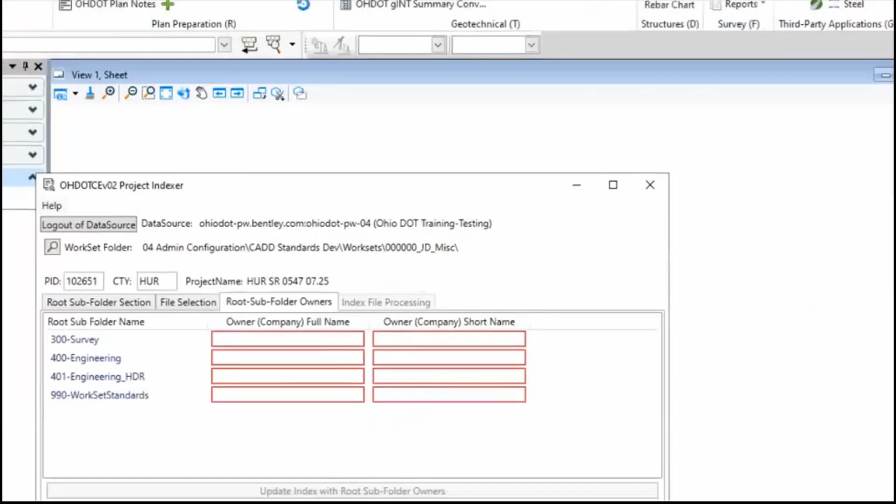So let me move forward a little bit. We'll get to the next section here in a bit with the references and the DGN data, how it'll extract that - some pretty cool stuff going on with the missing references. But moving back over to the application, that's adding all the files that you want included.

But then the next section is going to be telling me who the folder owners are. Those are the root folders that you checked on in the first tab, so it'll be populated here. All those folders that you included in your index will be listed here, and it's just asking for the company full name and an abbreviated name.

The main reason I'm doing this is so that when I import it into ProjectWise, I can create the equivalent folder in ProjectWise. If you guys are using a 400, well, I can't use 400 for you since we already made use of that. So this is how I'm going to do it.

So you're just going to put in the name. I really went back and forth here - I debated making this a list to keep it standardized and make sure everyone's using the same names and abbreviations, which I decided to go against. So if you guys could do a little bit of due diligence in making sure you key in the right abbreviation for your company, and try not to have all your users using a different abbreviation - but it's not as important. If you look through our data source, you'll start seeing different folder names because people submitted different abbreviations. That's the way I went.

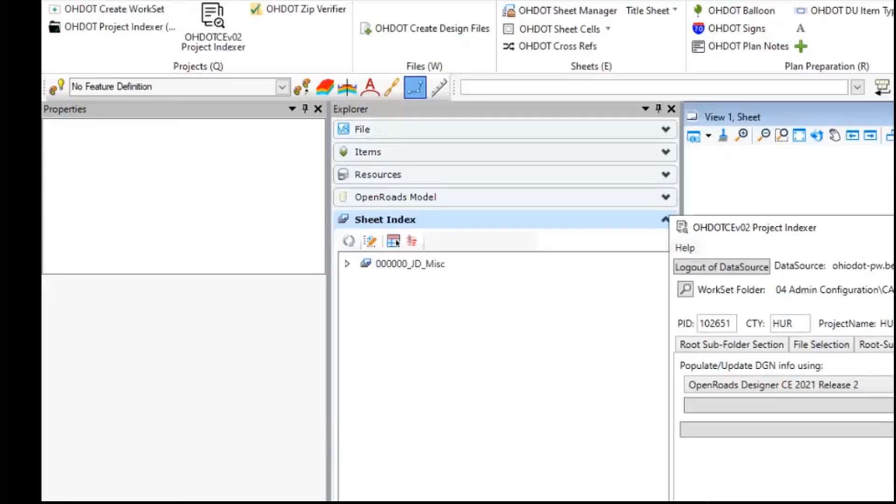So here's a quick example: if ODOT was the owner of that survey folder, I'm putting ODOT down. If HDR, whatever company it is, that's what I'll put down. And when I'm done filling that out, I'll just hit update index and it'll populate the second tab. Hopefully that makes sense - it's really just the root folders in the project directory, saying this company was working in this folder, this company was working in that folder. The 990 folder can just be the prime, since really everyone is working out of that - there's not an individual one for that.

So then after you do that, it'll move you on to the last tab, which is the index file processing. So if you included a DGN file, you'll see a drop-down to choose a version of either a Connect product, so ORD, OBM. It'll look at what you have installed and populate your list, so you can choose which application you want it to use to process the DGN files in the background.

If you don't have any of that, you won't see that. If you don't include a DGN file, you won't see that drop-down, and you won't see the button that says populate update DGN info. So when I hit that button, it will start a background process that will go and look at only the DGN files you've included in your index. The previous version of this app was just automatically looking at all of them, so it took a lot longer to run. So with this, I tried to minimize that.

So if you are in ProjectWise, you do get this initial prompt about manage configuration, copy out, but after that it should stay all in the background. And it'll go through and pull out - if it's a sheet file, it'll pull out the sheet title and populate that. It'll get the numbering, the sub numbering.

If your file contains a page range, like multiple sheets in the same file, all on different models, one sheet per model, it'll list the sheet number as a range, just the lowest and the highest. So you can kind of see in there, some of them have ranges listed, and some have just the number listed. Page numbers should be P dot, hopefully everyone knows that. The sheet title is useful because you can see what that sheet was. If it has multiple lines, like a subtitle or title 2, it'll pull that data as well and put a little bar in between so you know.

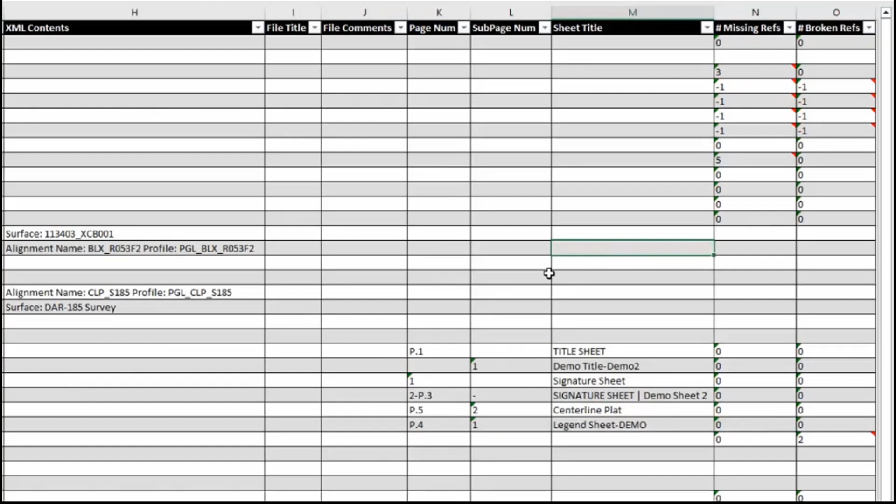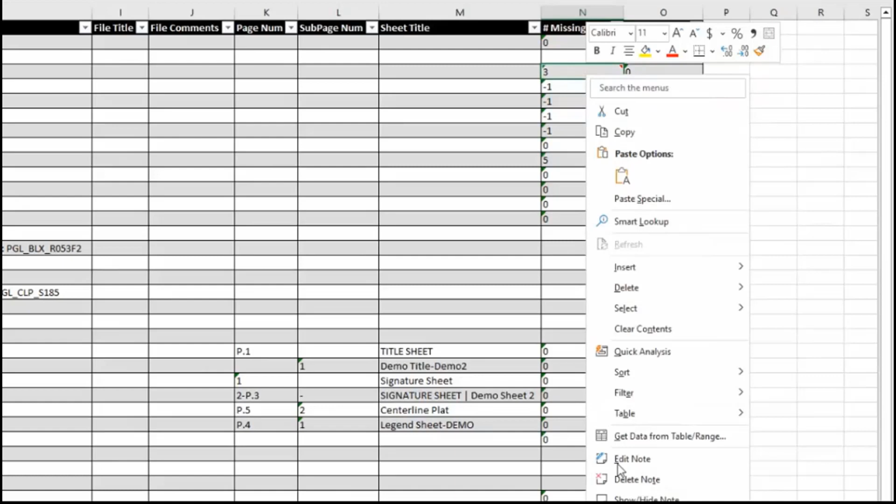Then the last thing we'll do is check for missing references and broken references. A missing reference means the reference is not broken, but you did not include that reference in your index. It'll list the number, and there'll be a comment if you hover over it giving more details about that missing reference. Or if you have ones that are missing, it'll say this model is not included in your index, but here's the reference in this file. The broken references means there's a reference that's broken, and it'll try to give as much detail as it can, saying in this file, in this model, this reference is broken. Ideally, we don't want to see missing or broken references.

So here's a great way for this application to tell you, here, this file's got some missing stuff. Maybe you go look at it and go, oh yeah, this is an old reference, let me get rid of that, we don't need that in there. Or, oh, I forgot I needed to include this file because it is referenced and is being used. So it's a nice little check for you there.

So that is the intent here, to try to make sure the data we're getting is not too junked up, because we really don't want the scratch files. We don't want data that is just there, not really holding any pertinent value to us. That's part of the reason why the index is here, so you don't have to include all of that. We don't want you to just zip up your whole project and have all the extra data that we don't want.

Here, we're giving you the ability to check on what you want, and then when you create the zip file, it will maintain the folder structure. That's the important thing, because when I import it into our data source, I still want that folder structure, I just don't want the extra files. So everything listed on the index, when I go back to this application, there's a button to create the zip. Anything listed in the index file is what will get included in the zip file, and will maintain the folder structures. That's how simple it is.

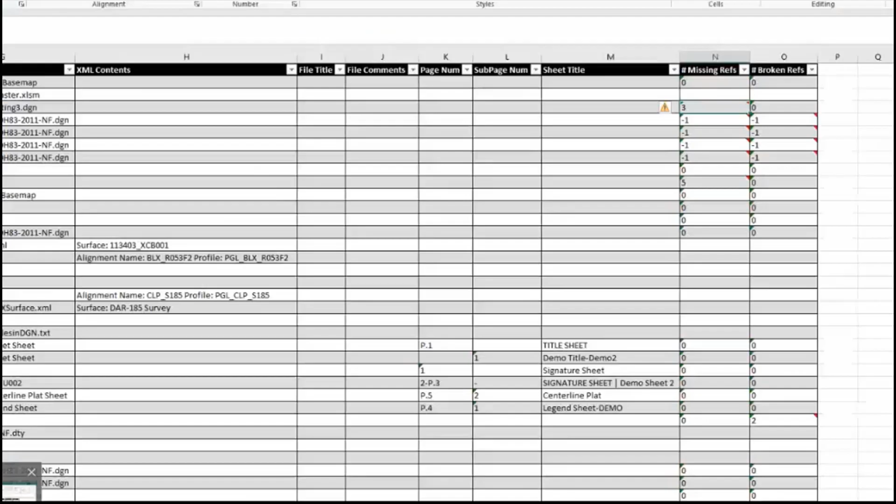Now, when I click this create zip file, it should open up a save as dialog. It will force you to save your index. So if you did this whole process, right now this Excel file is open in memory, it just opened it up to memory, there's no real save location. If you try to create the index zip file before you save it, it'll prompt you and say, hey, you need to save this file first. You go ahead and save it and then try again, and it'll create that zip file.

How am I doing on time? When was the session? Okay, it's supposed to go to 45, 10 minutes. I'm a little ahead of schedule.

That's all right. So I think I'm going to click that button now, and it'll create that zip file. So there's that message, it's open in memory, you must save it. So, okay, I'll go save it.

Then you tell the application where you're saving this. I don't want to make the assumption of where to save it. I did that in the past, and it just caused problems, especially people wondering where it saved it at. So I'm trying to always let you choose where to save it. Same thing with the zip file, it'll prompt up and say where you want to save it. I think I do start you off in the desired folder, I don't know if that was the reviews folder or the contracts folder. Well, in ProjectWise, I guess I don't, but outside of ProjectWise, I do. So I'm here, I'm just going to navigate and go pick where I want this saved.

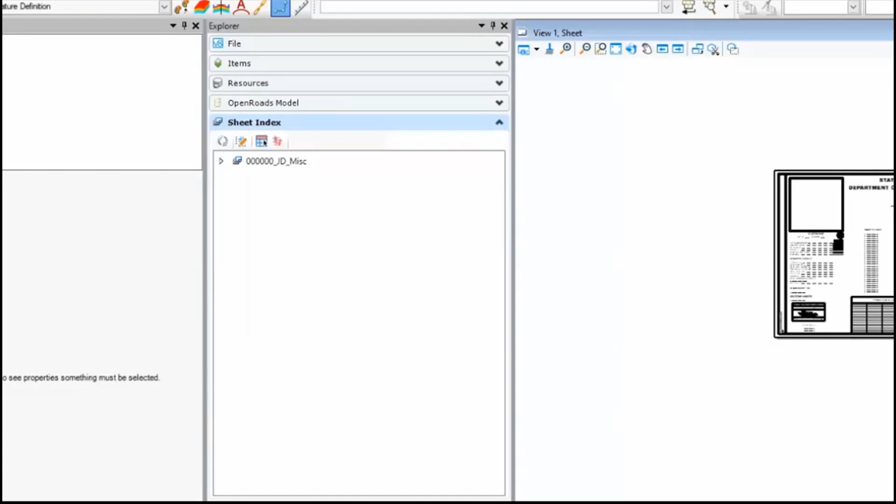Not too much has changed. It's kind of a facelift on the interface and the application, but overall a lot of the same things are still required. We added in that 3D line strings, or moved the reports, but that's all it is.

I think I'll skip this part, but this is going back and showing you how to update an existing one. So you just check on that update existing index, then choose the actual index Excel file, and it'll read that data in.

Now, the thing to note here is that when you read the data in, it will check on all of the files that are listed. But if a file is listed that it can't find in the folder structure, obviously it can't check it on, right, because it's not there to check on. It will list that file in the results section at the bottom. It'll be red, saying, hey, this file doesn't exist anymore.

I did open up the freedom to show everything, but the still kind of requirement is that all the files are within that PID folder. So don't try to add something outside, because when you run this, it's basically going to disappear because you can't find it.

So it'll recheck on the files, but every time you replace the index, it's replacing all the data. So if you need to add one file, it's not like you only check that one on — you read in the existing data, it checks on all the files, you just check on the additional file you want added, and it'll replace all that data. But it will maintain the descriptions. If you typed in descriptions in that Excel file, it will maintain those when you replace it.

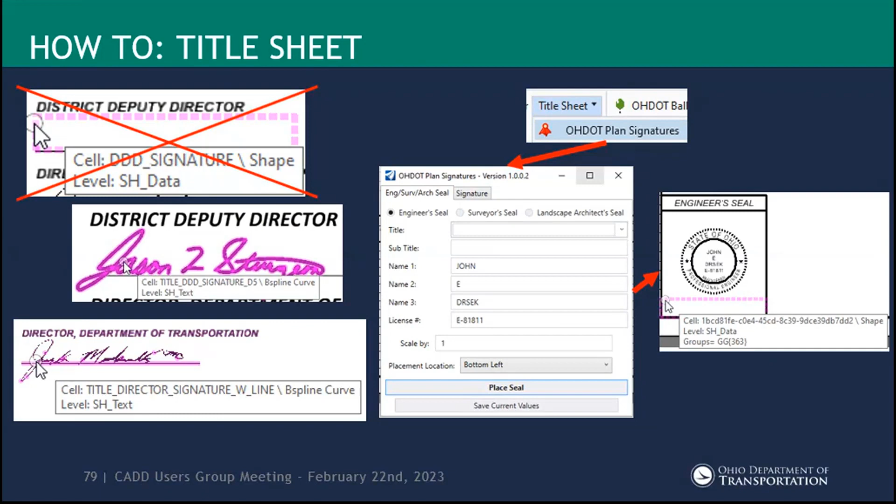So as you can see here on the right, if you haven't configured the project's configuration file correctly, which is going to be shown in this video, you'll get that error code when you go to place a seal before you've configured that file. So I'm just going to briefly go over how to place a title sheet and place an engineering seal.

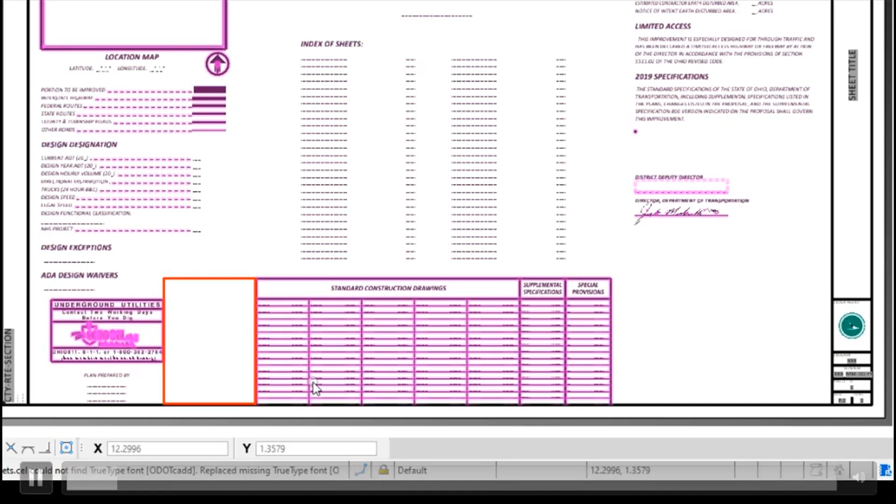As you can see here, we've placed the new title sheet cell. If you look down at the right, we've added up to 6 digitally signed seals here for engineers, and we've also added an additional 2 here on the left. This version of the title sheet has the signature cell field for the district deputy director, which is now going to be offered as a cell. You'll also notice we've added the director's signature here as a cell as well.

So now that I've gone over the overall layout of the title sheet, I'm going to briefly go over how the workflow goes for placing an engineering seal with a signature field. To do that, we're going to go up to the OHDOT workflow at the left, select the apps tab, go to the sheets section, then go to the title sheet drop down and select plan signatures.

As you see here, we have the application. There are 2 selections at the top: the engineering seals tab and the signature seals tab, which is going to be offered for local officials and city officials, which we'll cover in another slide. You'll also notice a couple toggles here at the top for the engineering seals, the survey seals, and the landscape architect seals.

You'll notice when you click through these that the landscape architect seals and the engineering seals are very similar. The main difference is the landscape architect seal is slightly bigger than the engineering seal, and we recommend not using the subtitle with the landscape architect seal because there will be some text overlap issues.

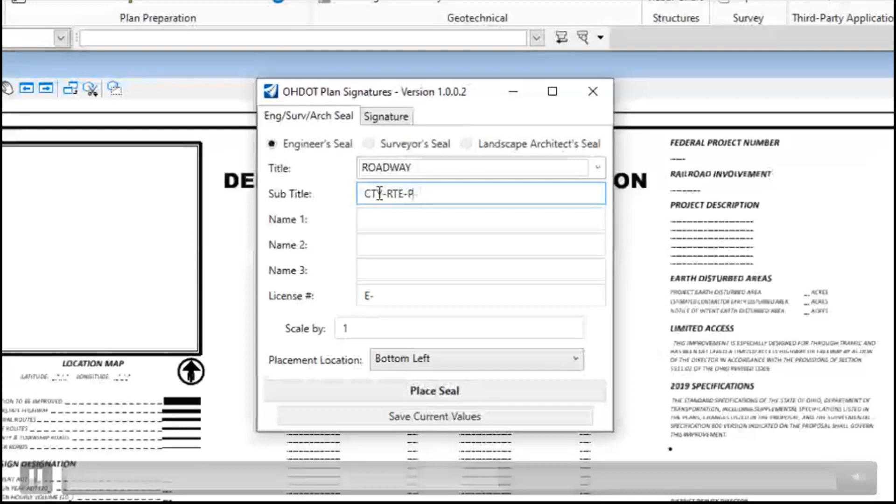You'll notice we have a name 1, which is going to be your first name, and then name 2, which is either going to be your middle initial or your last name if you don't have a middle initial. In my case, we're going to do middle initial and last name for name 3. And then you'll go ahead and place the license number as it states there.

And also, I just want to quickly touch on the scale by. This is going to be used mostly for your right-of-way disciplines. We'll cover that as well in another slide.

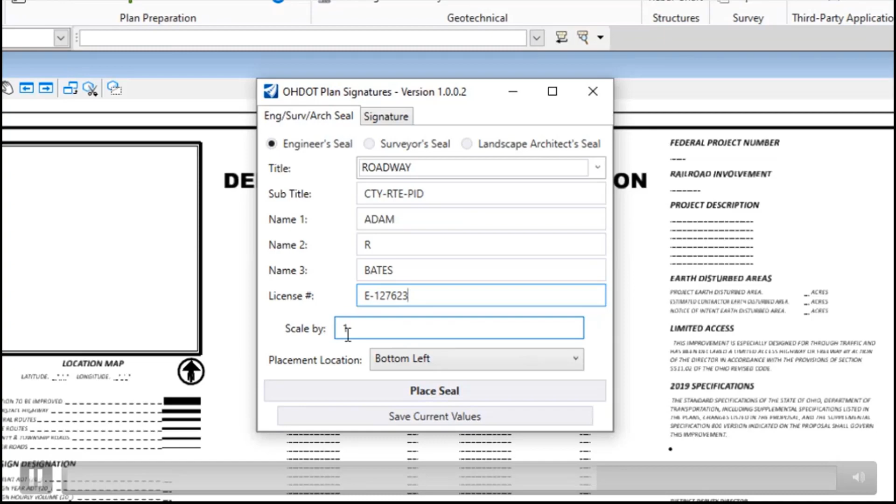Now if you look at the place location, what that drop down does is it changes the insertion point of the engineering cell. So bottom left would be to the right of the sheet, and then bottom right will be to the left, as you can see here.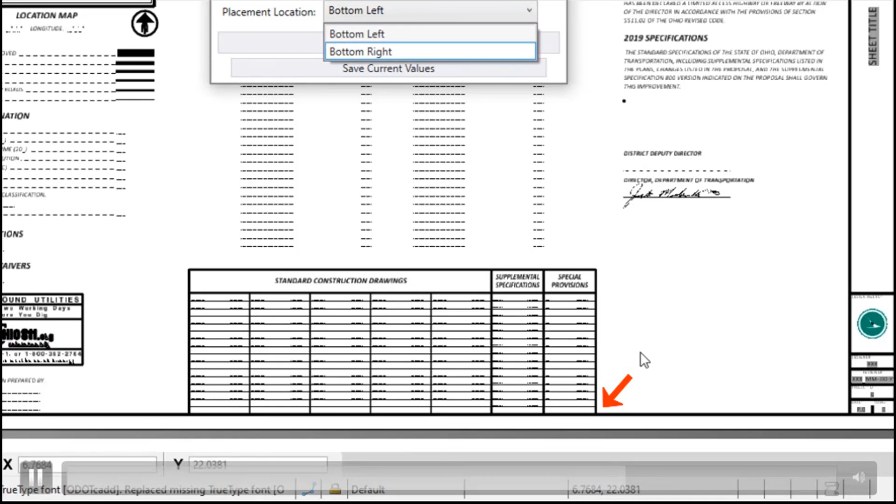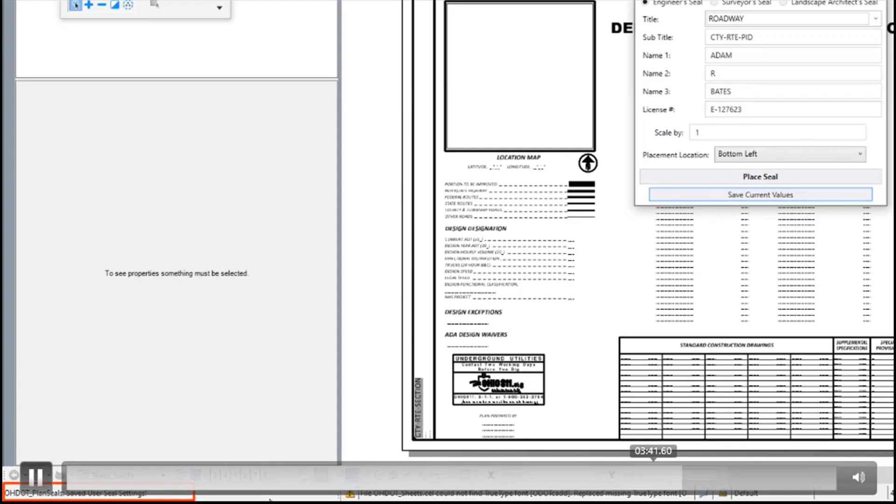And then I'm briefly going to touch on the save current values and what that does. So what that's doing is it's saving all of those fields that you filled out, and it's saving that to your user preferences or user profile. I'm also calling that out here at the bottom to show you where that's saving it to. So if you were to accidentally close that, it'll be there for the next time you need to sign a plan.

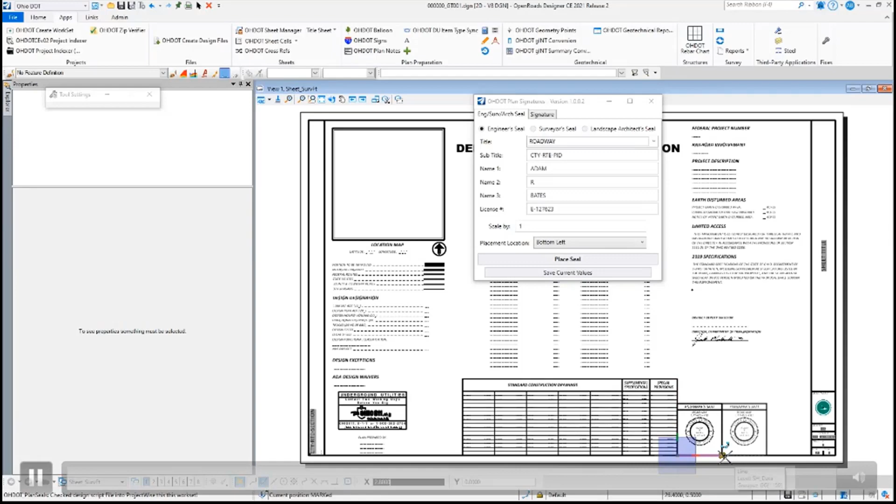After that, I'm just going to briefly tell you what happens when you click the place seal there. What that's actually doing is it's writing to the design script, which is located under the 990 WorkSet standards under plot DRV, right? So every time you place one of those, it's placing a new dynamic cell, as I'll briefly glance at here. This is also why when you click that, it actually takes a little bit to write that to the design script. As you see there, it was highlighted in pink—that's the dynamic GUID cell that's being written to this design script here.

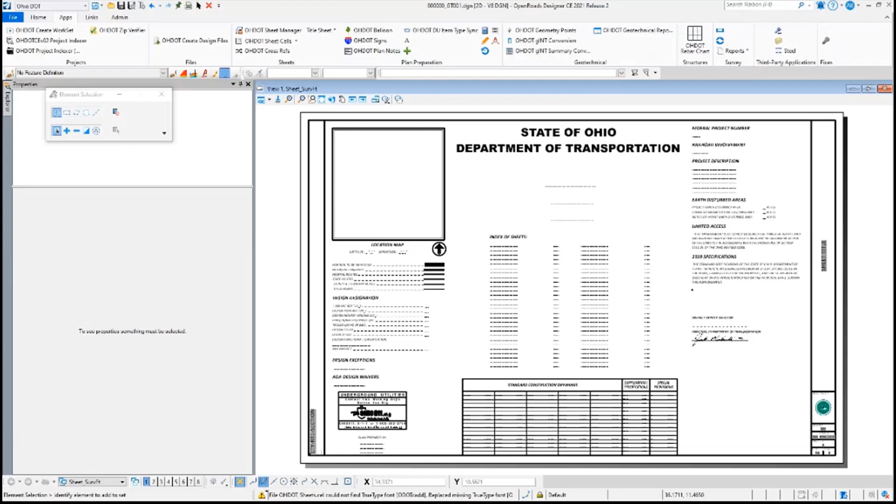So, the signature sheet. As you can see, there was a tab next to the engineering seals that was being offered in the plan signature application. When you go to place these, they're going to be a GU.dgn file, 8.5 by 11 size sheets, and the numbering is going to be separate from your overall plan set, so it'll be 1 of 1 or 1 of 2, depending on how many signatures you need for city officials.

I also want to touch on this: if you need to place these before you print them out, or if you need to print these out for someone that needs to sign them, and if there are digital signatures there, they're going to break, because this application is placing those signature fields. So just note that if you need to do that, someone needs to re-sign it as they bring it back in. You can place those manually, which we'll go over as well.

Also, if this is needed for your project, you're going to want to specify that on your title sheet, as I'm showing here, that non-sealed signatures need to be shown on the signature PDF.

Right-of-way sheets. JD already touched on this a little bit, so I'm just going to briefly go through this. Overall sheet numbering, as you can see here, we're removing that. Subset prefix is going to be right-of-way dot whatever. And then you're also going to want to call this out on your title sheet, which we also commented on earlier for a question we had.

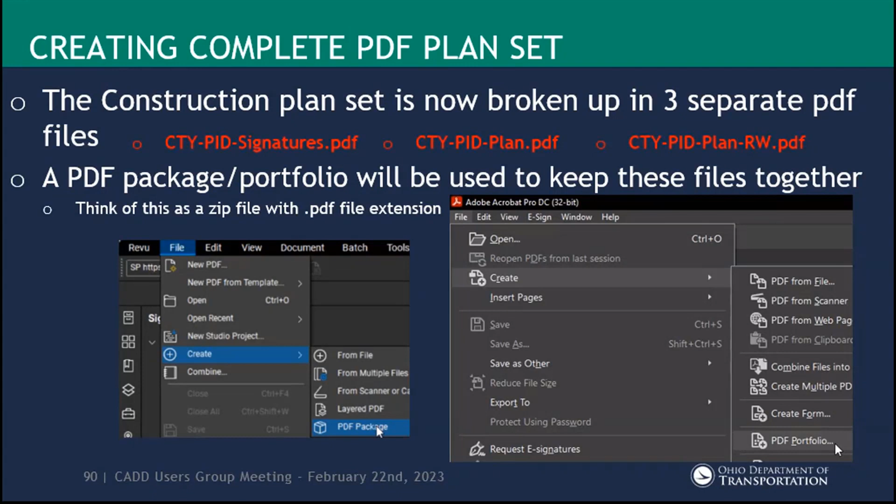So a PDF package and portfolio - what is that? Basically it's like a zip file, but the only thing that's different is it's for PDFs. It only holds PDFs and it's a PDF format. We're briefly showing you in both PDF softwares how to create one. In most cases it's File, Create, PDF Portfolio, or PDF Package. We've also got some videos on those too. We're currently updating these to have a little more information in there to help users understand that.

Verifying and submitting to central office - this is another section we get a lot of questions on. It seems to be a tricky subject for a lot of people. Really what we're looking for here is whether the document has been modified after being signed. If we look down here at the left in the white, we'll notice there's a comment after this person has signed it that there have been subsequent changes to the document. If you receive a file with these signatures and get that comment, you need to send it back to that person to re-sign the document. What we're really looking for is in the gray here, that there have not been any changes or modifications to this document after being signed.

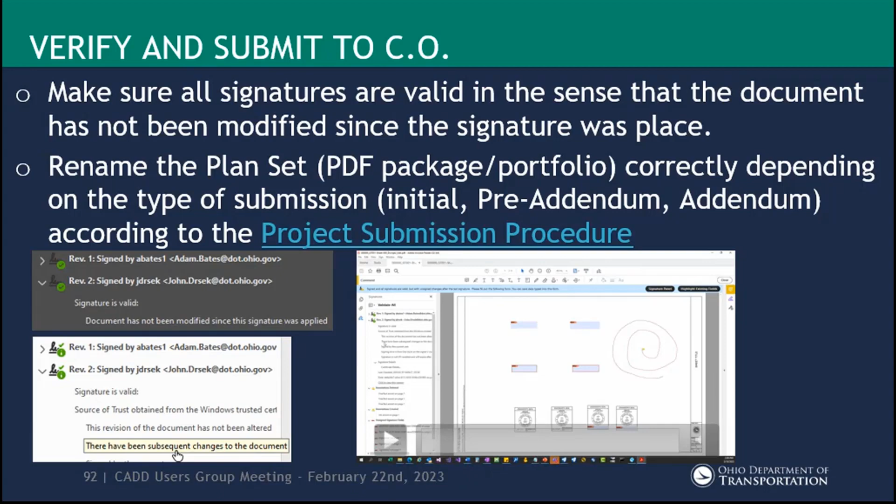All right, renaming the plan set - this is another one, the package portfolio name. Currently it depends on the type of submission: initial, pre-addendum, addendum. This is all according to this document here, the project submission procedure, which is linked within this. I strongly suggest taking a look at this file before submitting.

Okay, resources. Basically what we're suggesting is this is our one-stop shop for everything digital signatures and any kind of submitting documentation. First, let's take a look at the project submission overview. This incorporates basically all the documents and videos for making this submission via ProjectWise. This is mostly for our internal folks.

And then we've got guidelines for electronic digital deliverables, and this is the PDF plan set. This is going to house all of the documentation that's required for renaming and the naming convention for this document. And then the digital signature overview - this is basically a walkthrough for all of our videos and the digital signature process. I strongly suggest taking a look at our FAQ doc, because there's a lot of questions in there that we've already answered, and it's a pretty good resource for everybody.

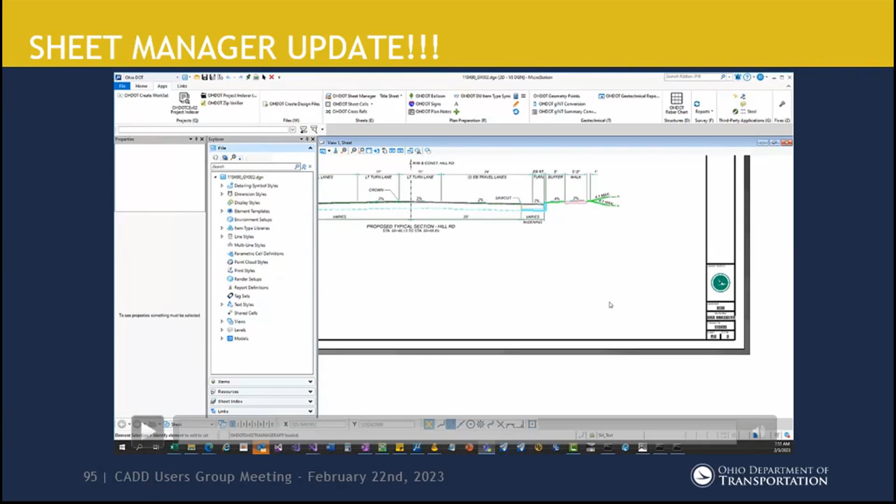So I have updated it to give another option. I'll play the video and roll through it with you guys. It's still going to be the same button, same location, how you launch it. But when you first launch it, you're going to be given 2 options: one to load it the way it's been loading, and another option to just read it.

So here it is. I get that it looks crappy—I only had a couple of days to do this, so I just put 2 buttons on there. Maybe I'll come back and make it look a little better. It's 2 buttons when you launch now instead of launching directly into the loading sequence, which takes forever. The 1 button on the right shows the way to read the DGN files. On the left, it's an Excel file. This video is a little old—I did add a little message above it to say select an option below.

So what I'm going to do is go over this Excel file and how it works. This can use your existing index files that you've already exported out. I'll show you how you can create one and save it. But when you click it, it's going to ask.

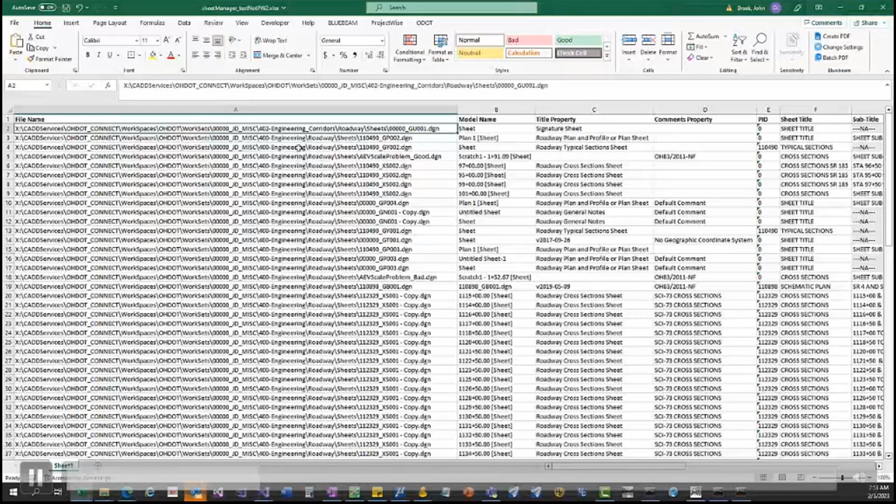So here's an example of one that's exported out. When you use this application to export a file, you get something like this—basically listing all that sheet title block data along the right side of the sheet. So you install that data in here, and you can come in and bulk edit it. Each line is its own sheet, so it really comes down to the model, because we have 1 sheet per model. It lists the file name and then the model name. Those 2 columns are the minimum requirement for the region—you have to have at least those 2 columns filled out, and that'll be an entry in the index or app once it loads.

If you're filling this out manually instead of exporting it, and you're in ProjectWise, the path is listed here—it's everything without the red. So if you wanted to create that index file manually from just your knowledge, without reading through it all, the path is the data source name, starting with the document. If you're outside, then it'll just be the path. The model name—everything else is extra data that's not required.

So again, what I'm getting to is the minimum that I need to make this app work. I'm going to click that button, and it's going to prompt and say, hey, what index file do you want me to read in? This would be the file that lists all of the DGN files and model names—it has all the extra data too, that's good. After you select it, it reads it all in.

So I did not read the DGN data, right? You get to this point without having to wait, which I think is what everybody wanted. That comes with a couple caveats though. When I click on it, I haven't read that DGN yet, so I'm only going to show you the data that you put in that Excel. If you have none of those parameters or properties listed, then obviously I don't know what to show.

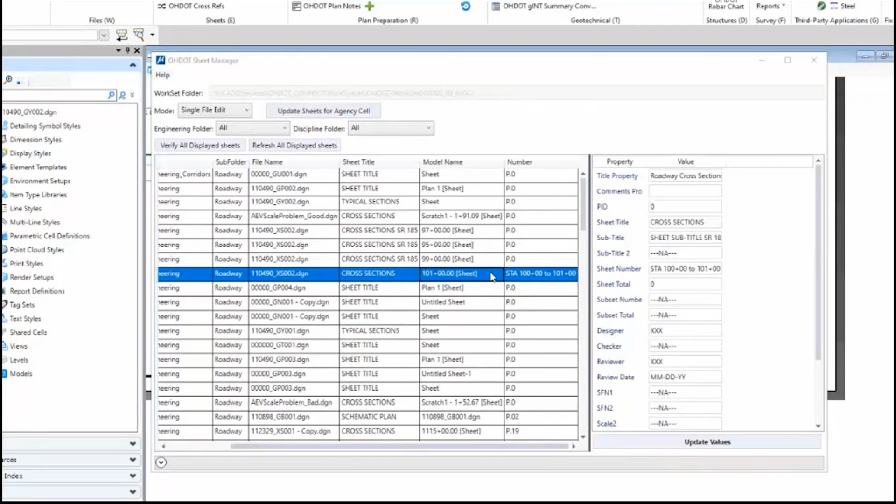Okay, so is it choppy again? All right. I'll try to talk really close. Here, I'll move this up. Maybe I'm just not close enough to it. Just moving around too much.

So overall it works the same way, the main difference is that's where the verify button comes in. So if you do bulk import, that initial read doesn't change any of the updated values in that Excel file, and you write it in. That's just going to list it here.

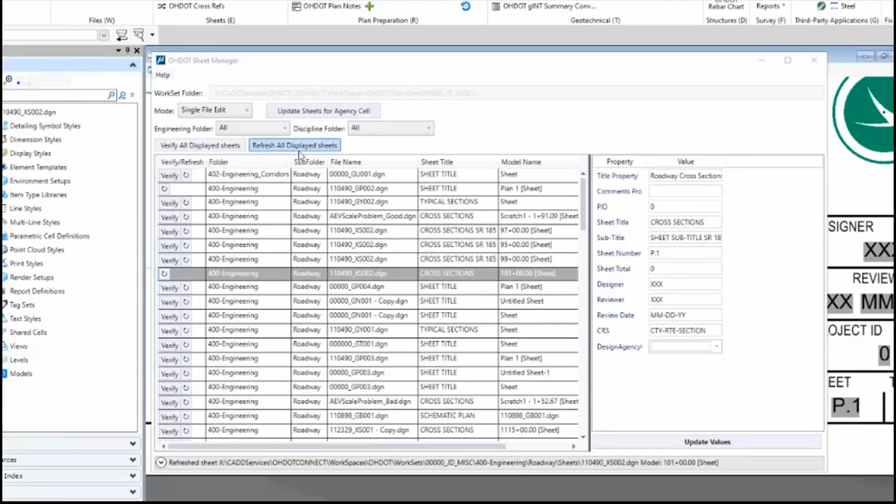So hopefully, I guess you guys are happy with this addition. I think it'll save you guys a lot of time.

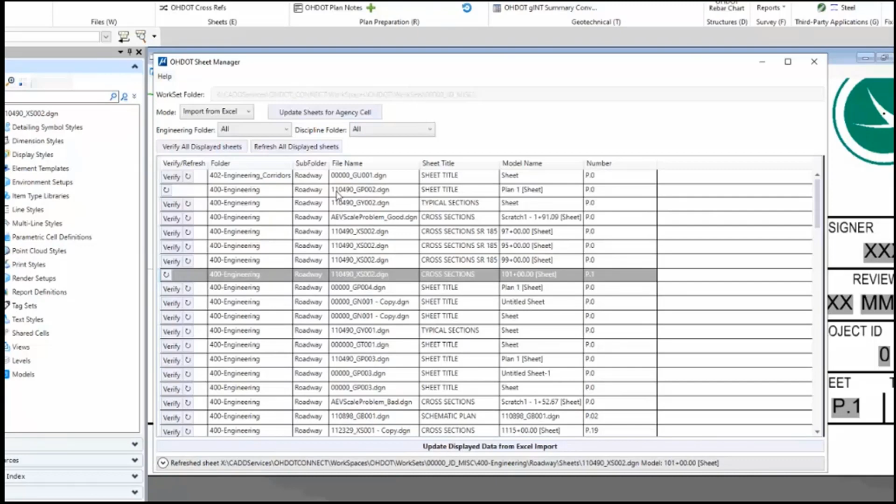Now in terms of that Excel file, if you run this the old way first, wait for it to do an Excel export, then you have that starting point. If you don't, all you need is those first two columns: file name and model. Just populate that however you want, files and model names, save it, then hit the verify button and export out the current data.

So this video goes over that, and there's audio—I posted it to our wiki page. But really, that's all it comes down to: that verify button, and then I have a refresh button as well.

So initially, reading in that file from startup, you don't have that data listed, you just have the first two columns. It's going to be missing until you hit the verify button.

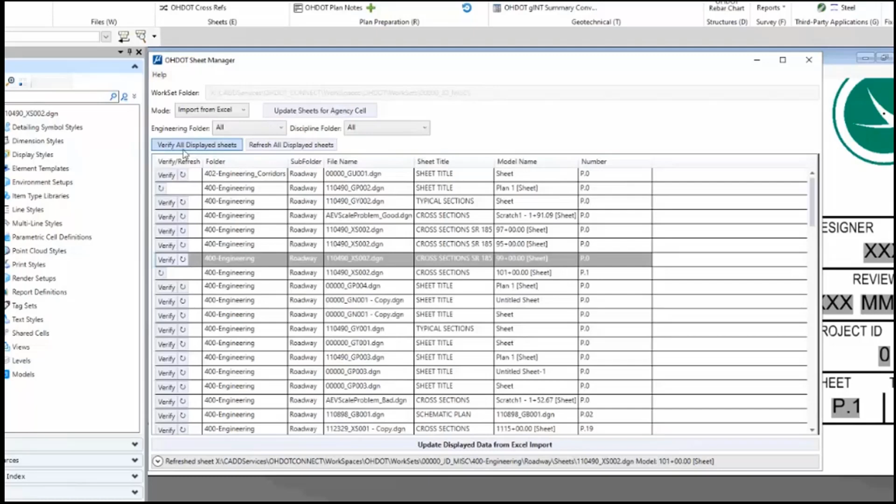Now the verify button will still leave the values you had in your Excel file. The refresh button is what will get the values from the DGN file. I don't want you to lose that data that you wanted to bring in. So if you want to do an individual update, it would read in those values, and then you could hit the update button.

So to clarify, the verify button just reads the DGN file and gives you the right properties. It doesn't actually read the property values from the DGN file, because I'm assuming you want what's listed in the Excel file. Once you hit the refresh button, that's when it will update these property values with whatever is in the DGN file. Hopefully that makes sense, and I go over that in the video too.

If the verification fails, it will tell you at the bottom, it'll be red in the results. It'll say, I couldn't find this model name, or there's no sheet that exists on this model, so there's nothing to update. It'll just keep staying there, and you can't really do anything with it because there's no cell to update. It doesn't have to be a cell, it can be dropped, but it'll still find it.